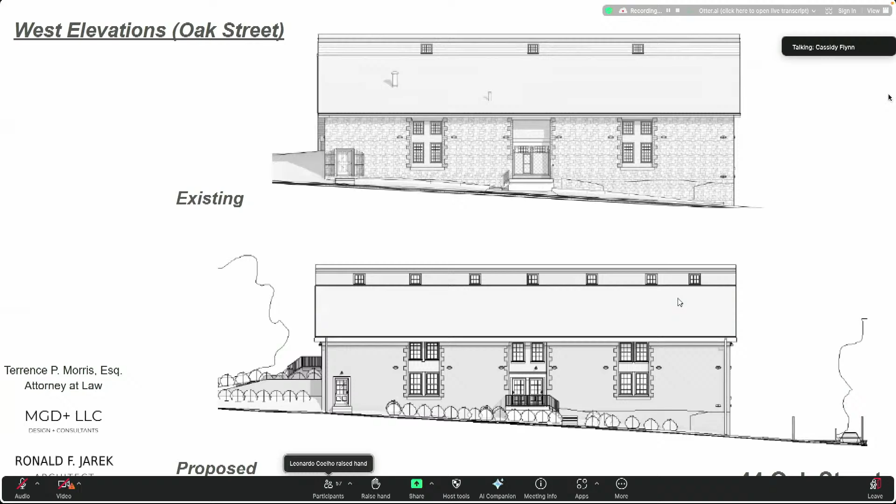We now move to a look at the elevations. The elevation on Oak Street, where the major challenge to this residential conversion is basically getting light into the upper levels to make residential use possible. In this particular case, you'll see some added windows to the roof monitor, as well as a refurbishing of the entrance for more residential feel.

Moving to the north elevation, and I should say that the north elevation and the south elevations are both similar. They are wood frame facades on the second level. These wood frame facades allow for increased fenestration. They're also characterized by commercial loading docks. You'll see in this particular picture that we have added fenestration to allow additional light, and we have made the entrance to the building more residential feel without reconfiguring the original entrance, which maintains its shape.

South elevation, as I said, is very similar to the north elevation in terms of the need to change certain things with the fenestration. This elevation, however, has a very beautiful arched entry, which is being refurbished from a loading dock into one of the main entrances of this building.

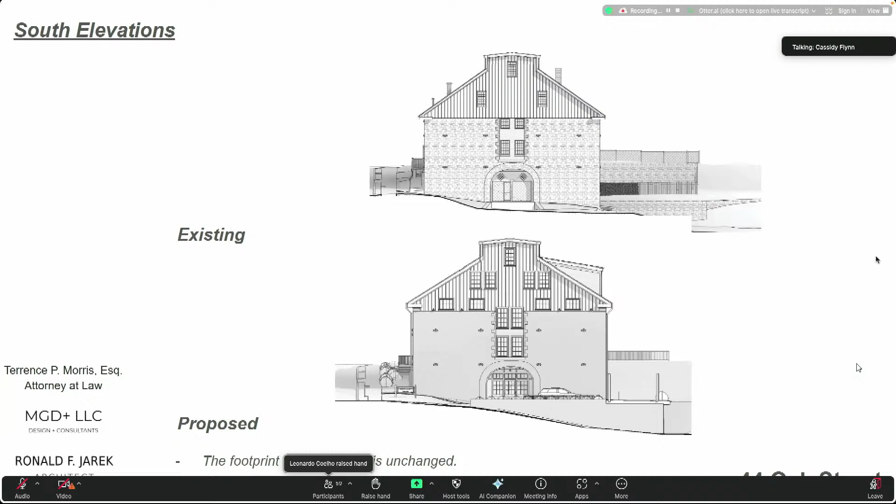On the rear elevation, there is a shed dormer roof established on the roof line, which significantly was approved by the Upper Falls Historic District Commission. In addition to that, there is covered parking shown to the lower left of the building, a covered parking canopy for 8 of the 12 cars that are provided on site. Again, this side of the building features an arched entry; this building historically has an entry on each of the 4 or 5 levels, and it's unique in that regard.

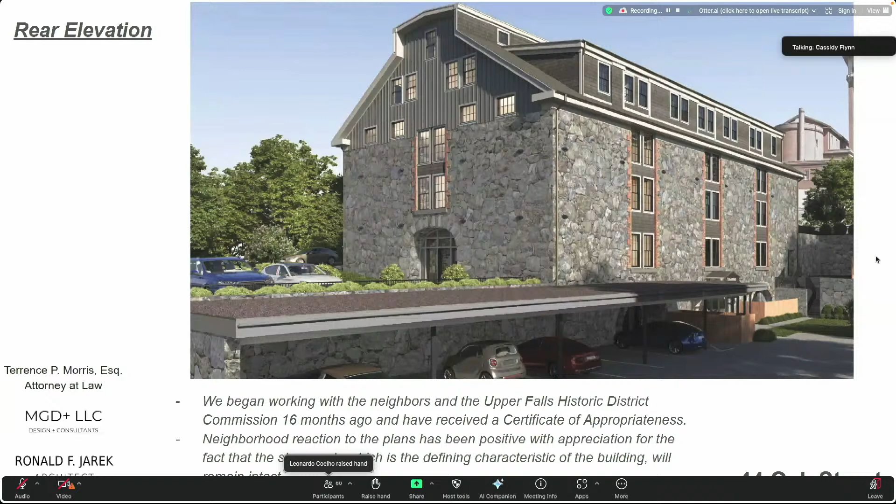Next, we go to the impervious surface comparison. There we go. The existing exposed asphalt will be reduced by 50%. All utility and curb cuts to service the building are in place. Nonetheless, we're proposing to reduce the number of curb cuts by removing one and the loading dock on Oak Street entirely. In addition, the existing curb cut on Cliff Road is being moved further from the intersection with Oak Street for safety reasons.

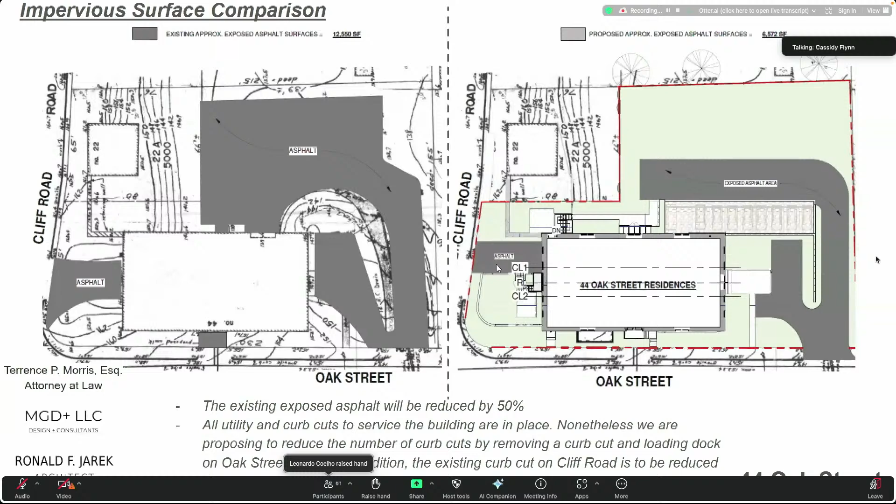Stormwater control, which is an important issue, is currently lacking on this site. It is to be addressed by the installation of subsurface drainage systems and a regrading of the topography to a collection point where all the storm water and runoff and roof drainage will be retained and controlled on site.

Finally, the landscape plan shows tree removal of 92 caliper inches and replacement trees of 126 caliper inches in compliance with the city's tree ordinance. A licensed arborist, having extensive experience with the requirements of the ordinance, has been engaged, has inspected the site, and has made recommendations which are shown on the final site plan to protect trees elsewhere on the site.

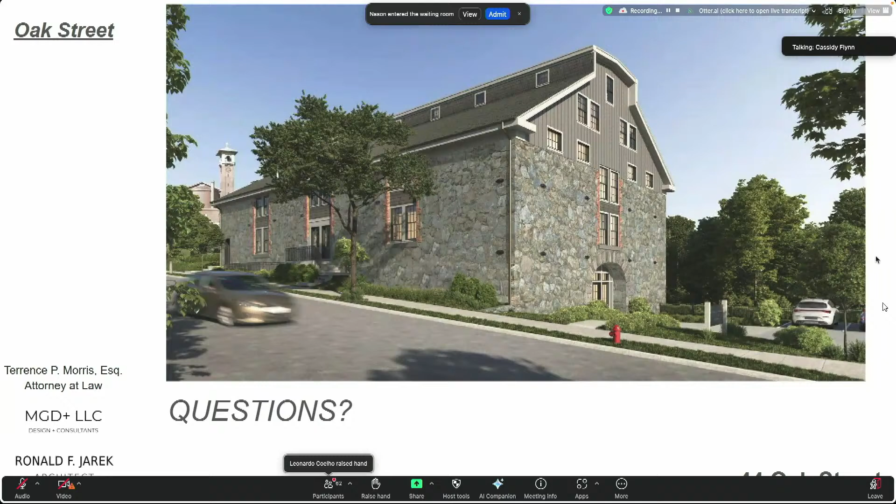And with that, Madam Chair, members of the committee, that concludes our formal presentation, and we are available for any questions you may have. Thank you, Mr. Morris. And as you promised, that was under 5 minutes. Appreciated. Thank you very much. We'll hear from planning. I think this will be very brief. This has been before us before, so let's hear from planning. Ms. Whewell, is that you? Yes, thank you, Madam Chair. Attorney Morris, could you stop sharing the screen, or your associate? Okay, thank you.

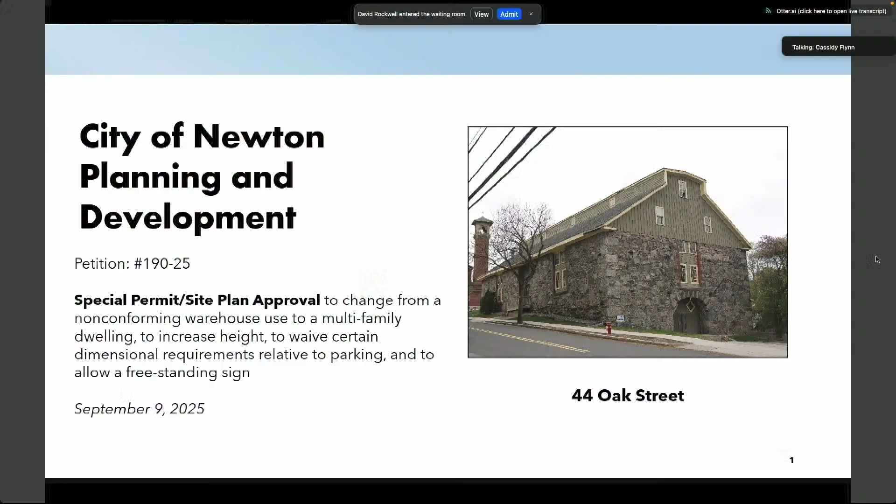So this is petition 190-25. It's a special permit to change from a non-conforming warehouse use to a multifamily dwelling. Some updates. This was continued from the July 8th, 2025 public hearing. Since then, the petitioner held a community meeting, which was requested at that first public hearing. Two of the trees initially proposed to be removed will now be maintained. That was shown in updated materials from the petitioner. The proposed dormer and overall site work remains the same, and the relief required remains the same.

So planning previously noted that this proposed residential use is compatible with nearby uses. The design preserves the historic character of the structure and was approved by the local historic commission. Much of the zoning relief requested, height and setbacks, reflect the existing conditions of the building and the site. Its status as a corner lot further constrains the site with parking and driveway placement, sort of necessitating that relief. And the freestanding sign that requires special permit relief will assist in wayfinding. Just some short updates there, and that concludes the planning presentation.

Thank you. Thank you very much.

Now is the time when we ask if there's any public comment. Anyone, any members of the public, either in the chamber or on Zoom, want to speak on this? We typically give 3 minutes per person, and I'm just saying that out loud because as we get into some of these larger, more complicated projects, if there are lots of people who want to speak, I may cut that back to 2 minutes in order to be able to hear from everyone. I don't think that's a problem tonight, but I'm just letting you know that if you'd like to speak, you have 3 minutes.

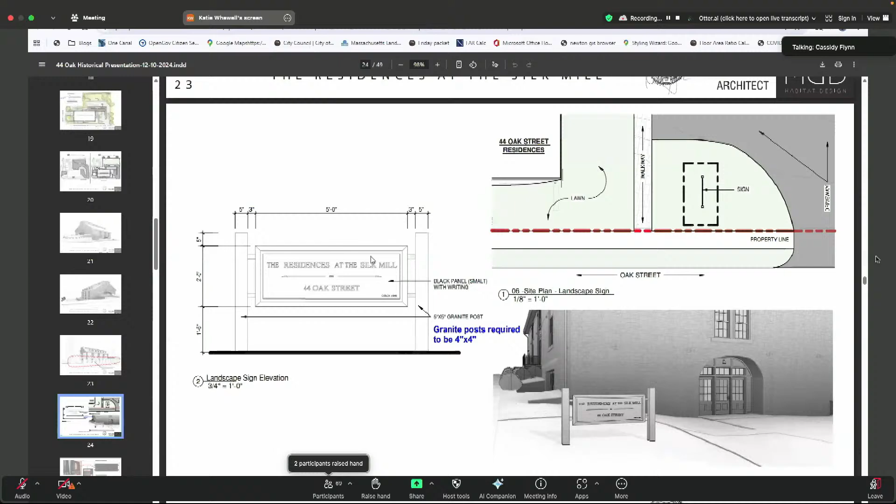Thank you, Chair. I will defer to my colleague from Ward 5 and take up the last speaking space. However, I did look under the NewGov files. I did not see a sign, and I assume Ms. Whewell misspoke when she said 35 square feet. That would be a big sign, wouldn't it? It would be. I have located it. I can share that. I had just wanted to make the point that there is a size restriction and there are multiple layers of review on the sign. Happy to pull it up. We're happy to give you another minute or two rather than feeling rushed. Okay, there you go.

And it would help us, I think, to know where you propose locating it on the site. That's clearly on the north end, along Oak Street, at the north part of the site. Those dimensions look accurate to me for the size. I was going to say 5 feet by 2 feet is the maximum, and that is the dimension size of the sign on the plan that I'm looking at right here. Councilor Lucas, are you set with that for now? Okay, Councilor Downs, are you done?

I will take up more at the end and let you go to other councilors and keep my hand up for now. Okay, I'm going to ask all councilors if you can really try and limit yourself to once per meeting. I understand that sometimes new information comes up, but for the sake of time, given how much we've got before us in the next few months, once per night would be my preference. I agree, but it's my ward and I think you want me to make the motion. I understand that. I'm just trying to announce it for everybody else's understanding. Thank you. Councilor Leary.

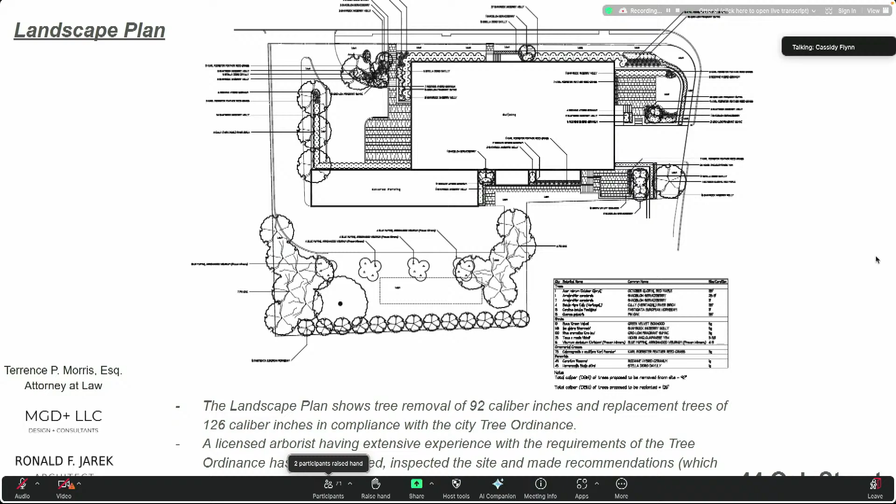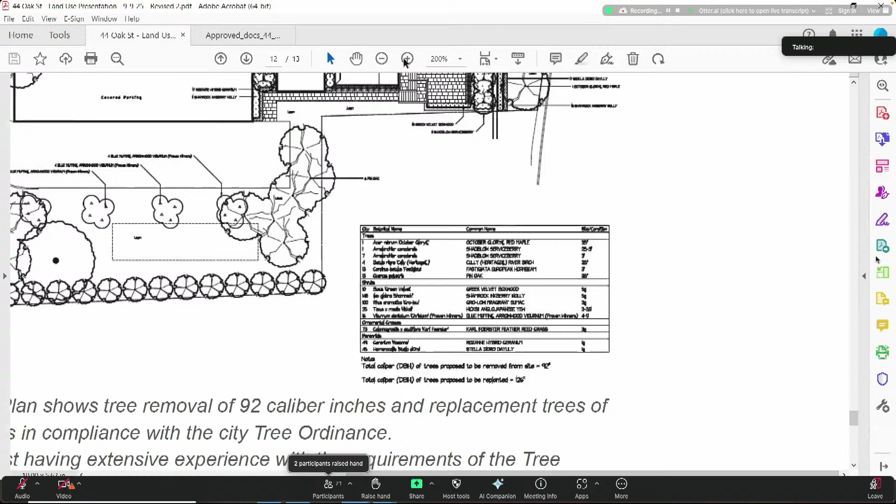I think the biggest emphasis that we had was on basically the number of caliper inches we were replacing, 50% more. Can't really read those right now. It is kind of hard to read. Possibly zoom in. It may still be too blurry, but the plant list is unreadable, at least by me here. Leo, can you blow that up at all? Is that in the little box? There we go. Still a little hard. Oh, there you go.

If you have your glasses on. It's blurry, but it is in the packet, the plant list. But they're all native species, correct? Green velvet, yes, correct. Okay. No, I think it's a wonderful project and I appreciate it. Most welcome. Thank you.

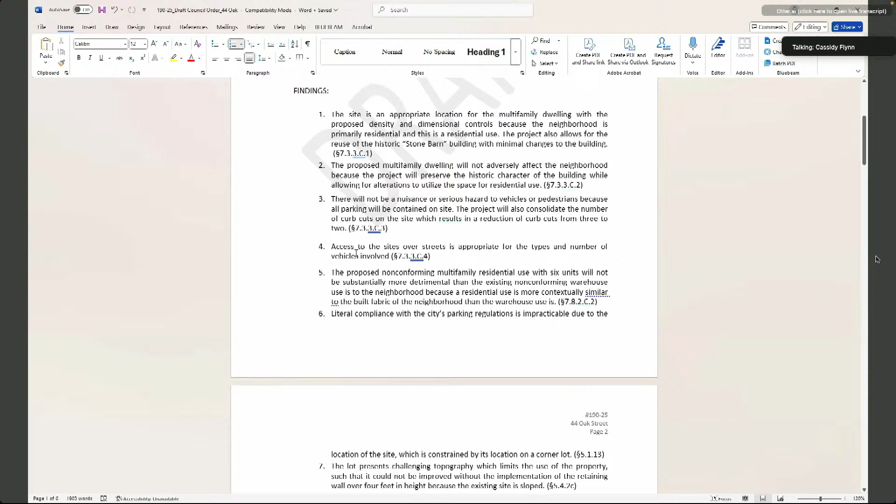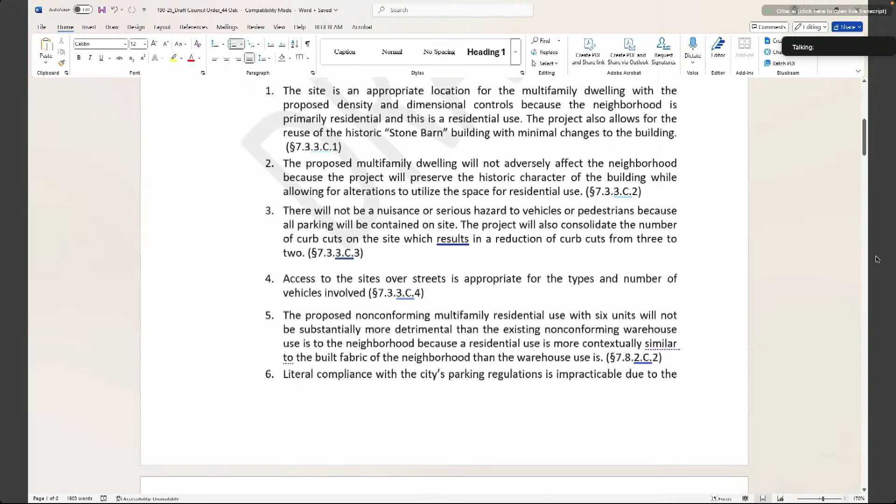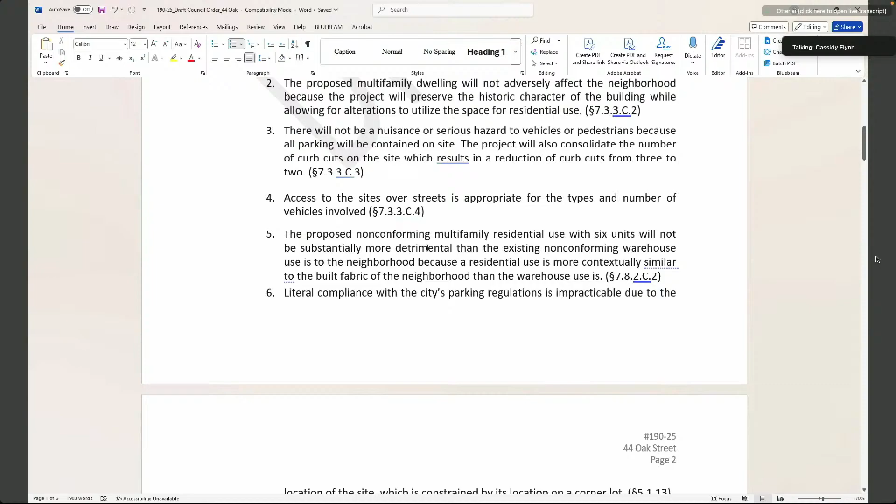So we have the 4 standard special permit criteria, or findings from the criteria. We've said that the site's an appropriate location for this project because the neighborhood is primarily residential, and this is a residential use, so it fits in nicely with that. The project also allows for the reuse of the historic stone barn building with minimal changes. It will not adversely affect the neighborhood because it will preserve the historic character of the building while allowing for alterations to utilize the space for residential use.

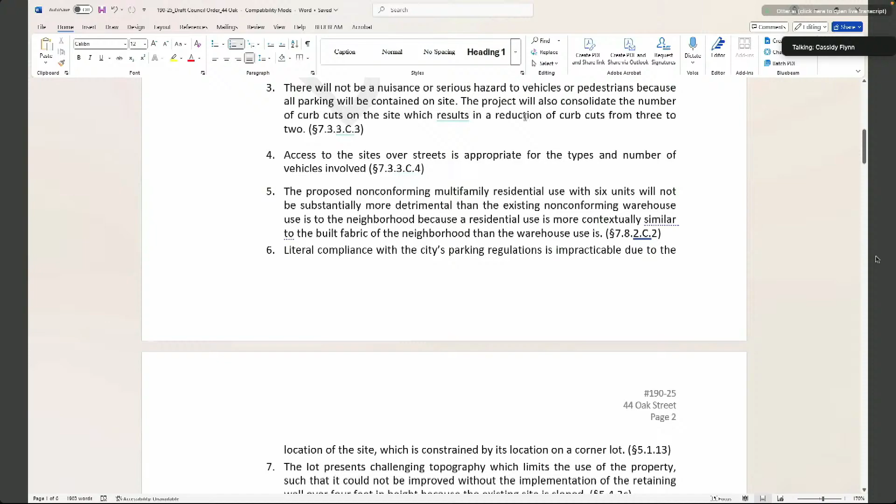There will be no nuisance or serious hazard to vehicles or pedestrians because all of the parking is contained on site. It will consolidate the number of curb cuts, resulting in a reduction from 3 to 2. Access to the site over streets is appropriate for the types and numbers of vehicles involved. The use will not be substantially more detrimental because it's a residential use and is more contextually similar to the built fabric of the neighborhood than the warehouse is.

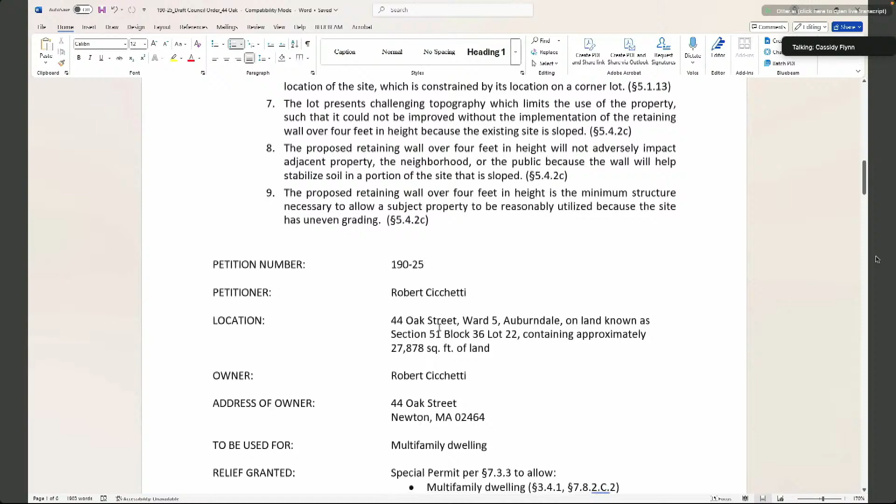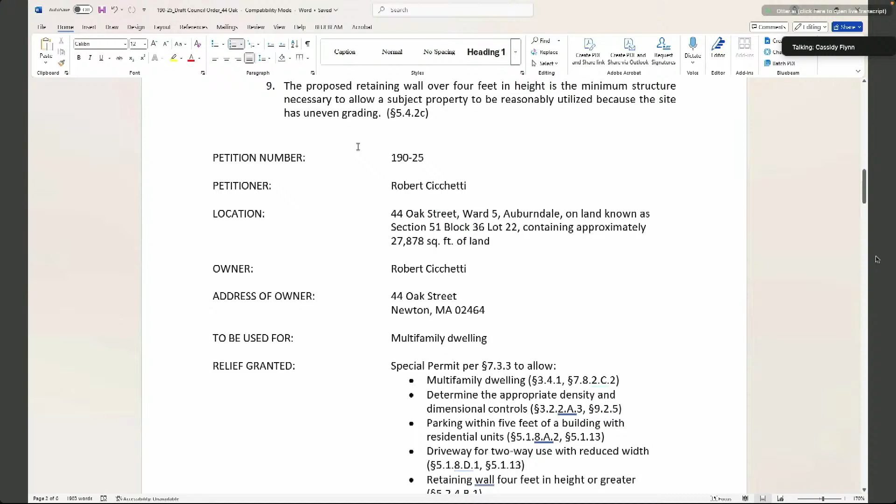A literal compliance with the parking regulations is impracticable due to the location of the site, which is constrained by its status as a corner lot, subjecting it to greater dimensional standards. These last three are around the retaining walls: the lot presents challenging topography which limits the use of the property such that it could not be improved without these retaining walls, because the site is sloped and has varying topography. The retaining wall will not adversely impact the neighborhood because it will help stabilize soil in a portion of the site that is currently sloped. It is the minimum structure necessary to allow the property to be reasonably utilized due to the uneven grading of the site.

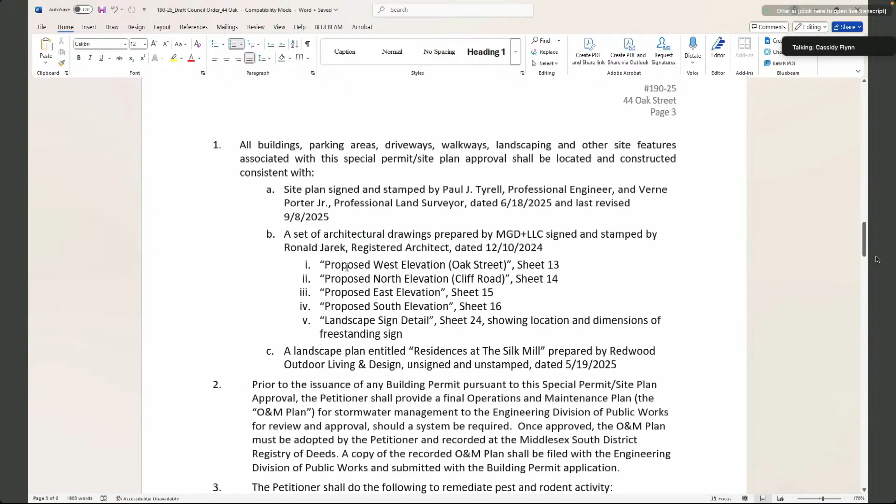And I will move down to the conditions. So we have the standard plan referencing conditions. This locks in the plans that were submitted to the Land Use Committee in the special permit: the survey, the architectural drawings, as well as the landscape plan.

The second condition requires an operations and maintenance plan for stormwater management from the engineering division, and requires that O&M plan to be recorded at the Registry of Deeds. We have the standard pest and rodent control condition. We also have the standard construction management plan condition, and the I&I ordinance condition. Because this is 6 units, trash shall be handled by a private entity. We have the standard building permit condition.

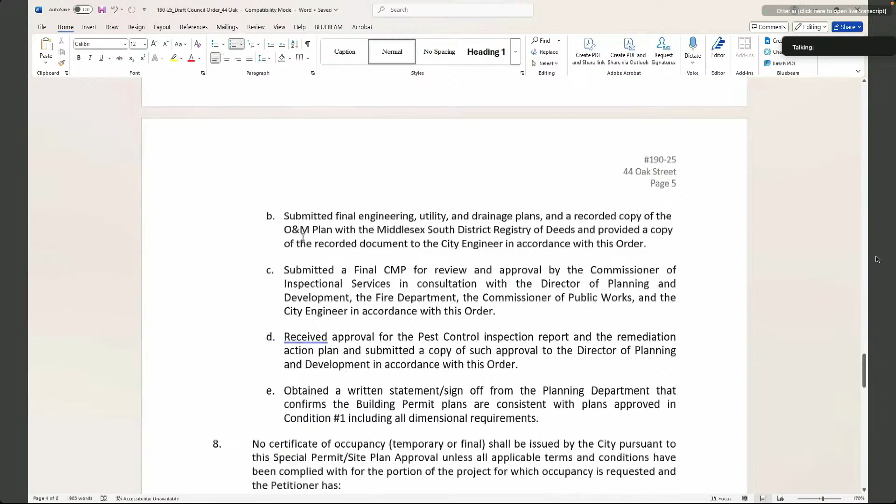And then the standard certificate of occupancy. Landscaping shall be maintained in good condition and replaced as soon as feasibly possible. And then the last condition just allows the Commissioner of Inspectional Services to issue temporary COs.

Thank you, Ms. Wewell. So there was a reference to the historic nature of the building. There is nothing in here about additional construction supervision. I personally agree with Mr. Temple that it is not our role to give that job to the Upper Falls Historic Commission, but I'd like to go back to Councilor Farrell and Councilor Getz to see if there was something that you feel would be appropriate or that is omitted in that council order. Mr. Temple.

Sorry, Chair. I was just going to add that if the committee wanted to, you could certainly add an additional finding that talks about the Historic District Commission's approval. Or, if you really wanted to, although I don't believe it's necessary, at the end of the plan reference condition, you could add the certificate of appropriateness there as an indicator that it must be complied with.

Thank you. I think that's a good suggestion. Councilor Farrell, does that suit you? Both of those? I guess raise your hand. I would, yes, but defer calling on you, Councilor Getz, if I may, to Councilor Getz.

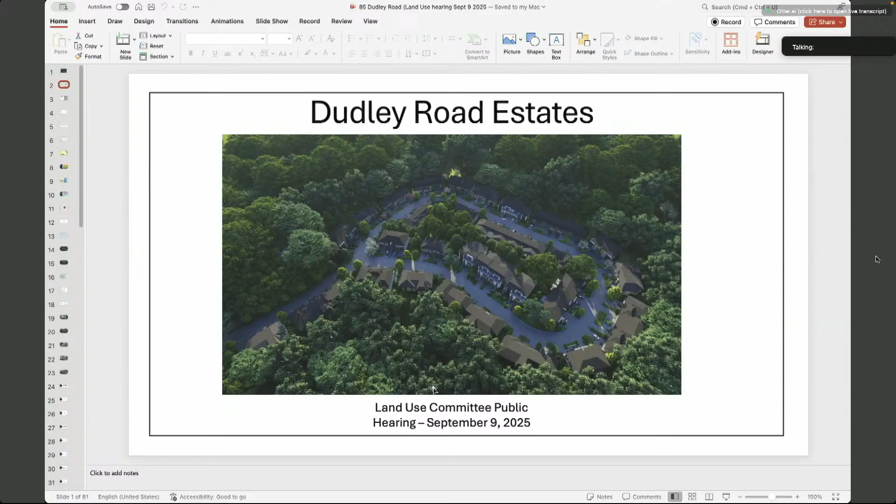With me tonight are members of the development team, a few of whom have strong local ties to the city of Newton. Cindy Stumpo is the principal of Dudley Road Estates LLC. She's also the owner of C. Stumpo Development, located in Newton on Route 9, a short distance from the subject property at 85 Dudley. Cindy grew up on Dudley Road, is well known in the community, has decades of experience building homes in the city, particularly on Dudley Road, and has local experience and knowledge that are important to understand the neighborhood.

Verne Porter, a professional land surveyor and consultant of the team, is also helping us tonight. Vern grew up in Newton and is very familiar with Dudley Road. Vern also has had an office in Newton Upper Falls for many years and has worked in the city. Michael McKay from McKay Architects is the designer of the project. Unfortunately, Michael is delayed unexpectedly, so his associate, Justin Bellucci, will be stepping in for him tonight.

Giovanni Vodera is the principal engineer of Vodera Engineering. Mark Zarello of Architect 31 is our landscape architect. Randy Hart from VHB is our traffic consultant. Patrick Daly is our energy consultant. And attorney Jeffrey Allen from Lawson Whiteson is our general counsel.

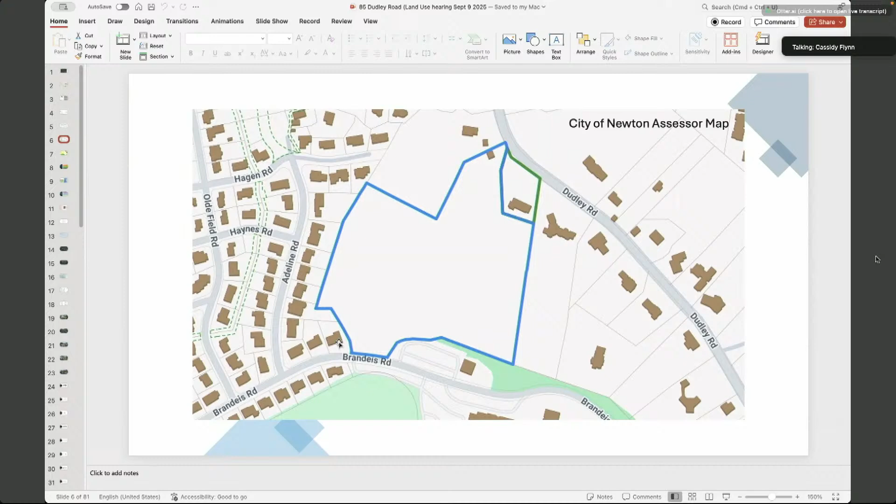Our proposal tonight consists of keeping the existing single-family home at 85 Dudley Road. Our plan currently is to rehab that property and erect 70 new townhouse-style single-family attached dwellings in 26 buildings. The new buildings will consist of duplexes, triplexes, and quadplexes. Unit sizes will range between 2,800 and about 4,500 square feet. The proposal will have a single entrance/exit off Dudley Road with a newly created private road, and the units are intended to be condominiums for sale.

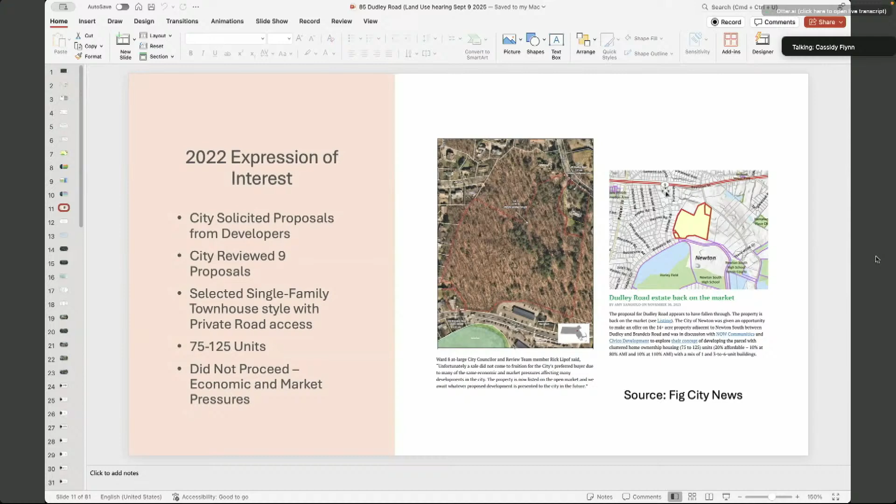And the developer at that point in time noted that a density of 75 to 125 units was an appropriate number for this location. For various reasons, economics and market pressures, the project did not proceed. The property was then put on the market, and hence my client has this property under agreement.

Justin, are you prepared to go ahead with this presentation? Are you able to find him on Zoom? Has he been asked to share his screen? There's one Justin on Zoom that I can promote. Yeah, if you can ask. He could change his name so that we know that it's really him. Okay, there we go. Can everybody hear me now? Yes, we can. Thank you. Okay, sorry about that. I was muted.

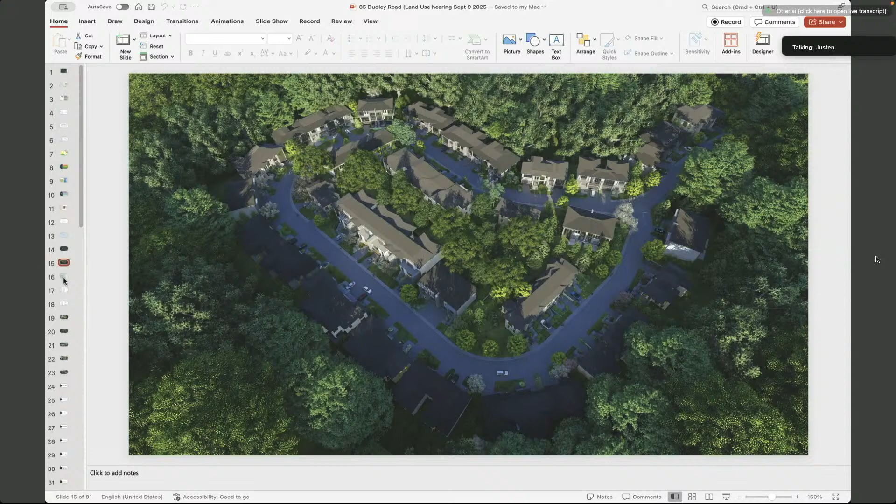Each dwelling consists of a 3 or 4 bedroom unit, along with the existing standalone single-family home, which will remain a single family. Here's the second view showing the opposing rendered view with the Dudley Road entrance in the top right. One thing that's hard to show on these renderings is the sharp grade changes throughout the site. Those grade changes produce a mixture of designs with garages at first floor grade, drive under garages with first floors above, walkout basements, allowing the buildings to conform to the existing topography wherever possible.

All the units are designed to be accessible and have the highest level of energy efficiency. First floor bedrooms are provided in 48 of the 70 units. That's about 70%. All the units will feature 3-foot wide doors and have elevators servicing all levels of the homes. Energy efficiency will meet or exceed all building code requirements. Included in that would be closed cell insulation, the window and door requirements, Energy Star appliances, and mechanicals.

Proposed square footage for the new units include basement, first floor, garage, and second floor square feet. They range from 2,880 square feet to 4,550 square feet. The existing house with a total proposed square footage of 9,051.

Just to give some perspective about the size of this development, the total proposed square footage for all the units from proposed grade would be about 240,000 square feet, which would produce an FAR percentage of 0.35. The total proposed square feet from existing grade would be a little bit higher at 266,000 square feet, which would produce a FAR percentage of 0.39. And for reference, the allowable MR1 FAR would be about 248,000 square feet at 0.38 FAR.

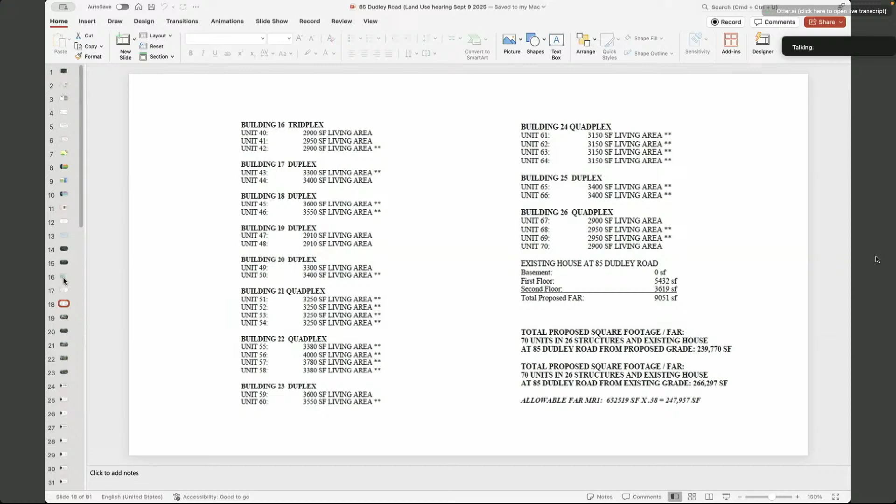The building height from existing average grade ranges from 32 feet to about 54 feet. These higher numbers are caused by the extreme existing grade changes of the development. The dwellings with excessive height numbers have walkout basements and or drive under garages where you would walk out the first floor to grade out the rear of the house.

Height from proposed average grade would range from 32 feet to 36 feet. There's two outliers to that, which would be building 5 at 38 feet, which we will work to reduce that number to get under 36, and the existing dwelling at 85 Dudley is about 38.7 feet.

The majority of the units are technically 3 stories because of the grade changes. But when the dwellings are finished and the site work and retaining walls are completed, all buildings will conform to the max 36-foot height as viewed from the street. Third story mostly would be basements too.

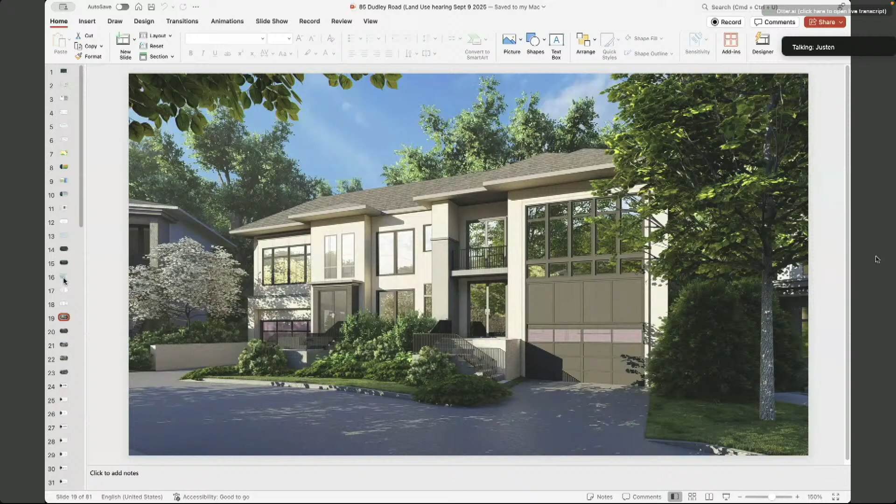The proposed architecture was intended as a reflection of the quality of the homes in the surrounding Dudley Road neighborhood. Contemporary designs are the theme of this development, featuring clean lines, asymmetry, large windows, and low-pitched roofs. The exterior finishes are a mixture of fieldstone, limestone, and smooth stucco. So this is a sort of a streetscape rendering of a duplex. You'll notice the house next door is a little bit different. We're going to vary the dwelling designs wherever possible to achieve more neighborhood feel for the development.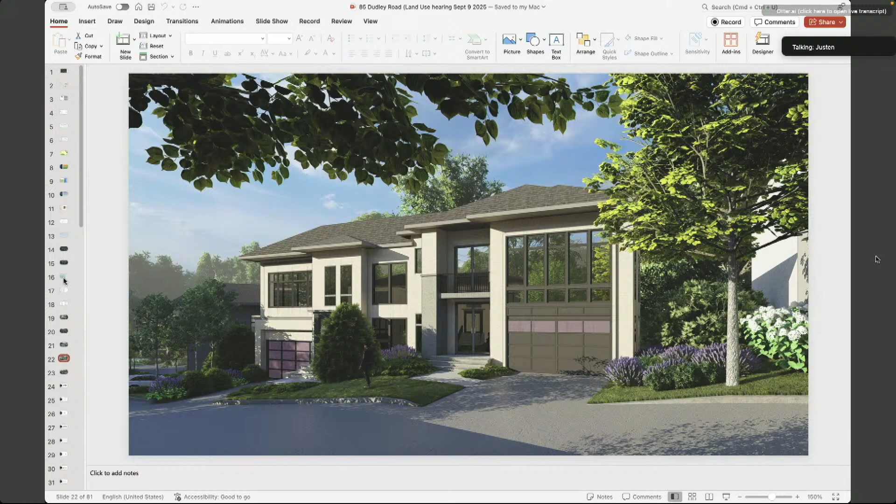Here is a quadplex showing the exact same thing we just talked about. As you go down the street and the street goes down lower and lower, each unit is stepping down to remain at a similar height to the next unit beside it. So conforming to the natural grade is the way we're developing these.

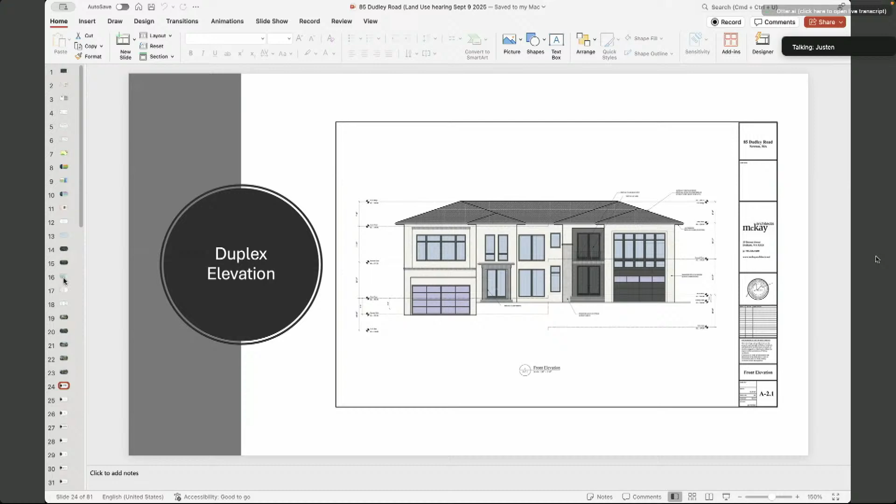So here's some typical units. This would be a duplex elevation. It shows a mixture of the stucco and the stone with different levels of garages as it goes down the hill, so it'd be typical. This is a typical duplex floor plan, open floor plan. Some have offices, some don't. 3 to 4 bedrooms per unit will be typical.

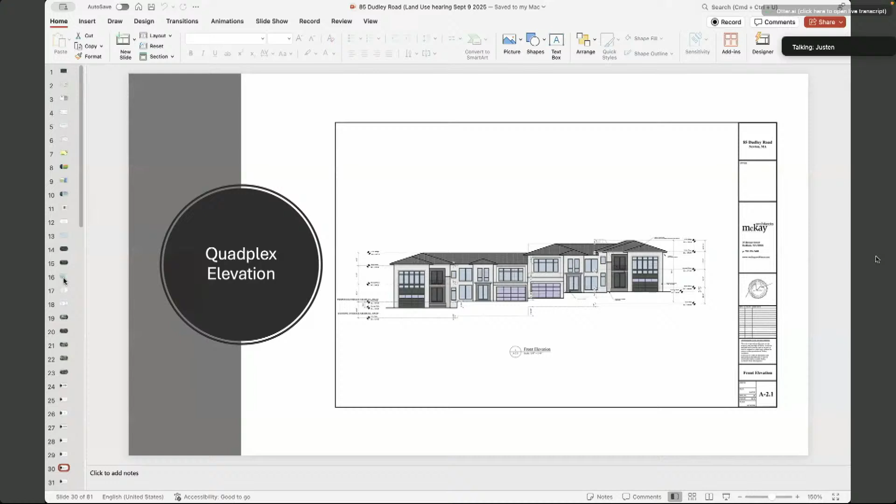Typical triplex elevation. Again, stepping down and down. Everything is very similar in the open floor concept. 2-car garages, 3 to 4 bedrooms per unit. Lastly, the quadplex. Again, it's almost 2 duplexes put together, differing grade levels as it goes down, similar to the rest of the units with open floor plans, 3 to 4 bedrooms per unit. Varying garages too, so sometimes on the outside, sometimes connected in the middle.

That'll about do it. If you have any questions, I'll be here to answer. So with that, I'm going to turn this over to Vern Porter.

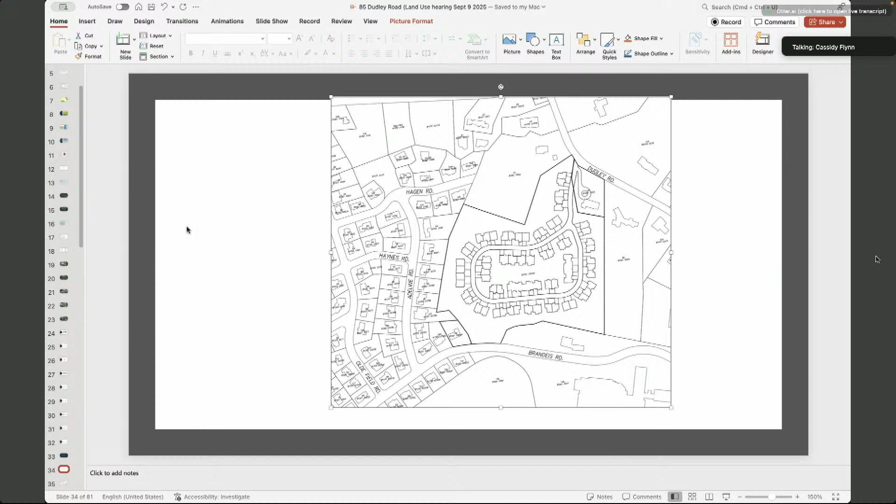So we're doing a proposed development with 70 units. The road is going to come from Dudley Road, and as you know, the site is very steep. We go to the existing conditions. You'll see that Dudley Road is elevation 205. Brandeis Road is elevation like 118.

Brandeis Road stops right at the school property and is now Lions Way. I think I saw the sign the other day. So the path that I talked about walking down is on that plan. You look, you see the path that comes down like right through here. Our development is going to have a road that comes down and around and loops back.

The idea to develop this site, I think the city ran into the same issues, is to create an area that you can put some units in and try to stay away from the perimeter of the property. So what we've done is come into the middle, created this area that's between that big P. I call it a P because my last name's Porter, so I didn't have anything to do with it, but all the buildings will be brought around there.

And there's some other site conditions. There's a high point in the middle, right in here. Right in there is a high point, it's elevation 197. The elevation of the road way up here is 205. And our proposed road here is like 185. Comes downhill, downhill, downhill to a low point, about 148 right there.

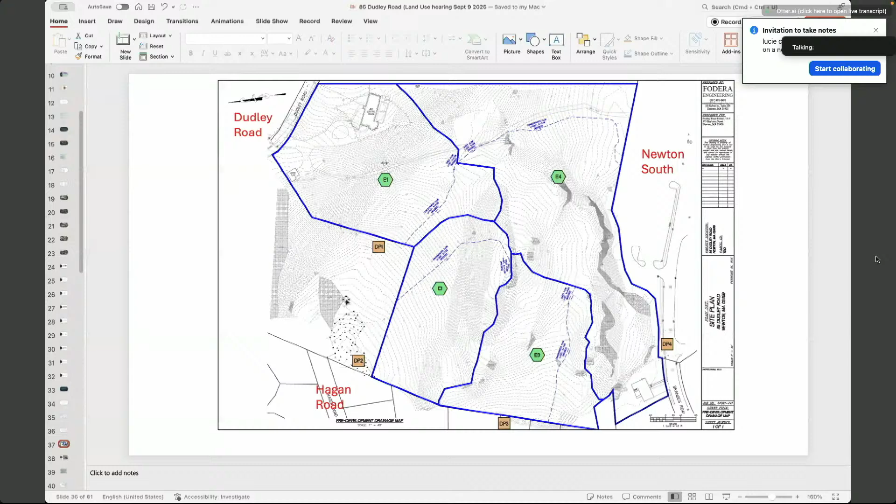And all of the water in this section goes down this way towards the houses that are on Adeline Road. So this is Adeline Road over here. This is Brandeis Road over here. This is Hagen Road. This is a small little wetland area. And what we're proposing to do is to divert the water. So go to the next one.

And we used values for woods and brush. Clearly, there's a lot of exposed ledge in there, which has a lot more runoff, but we were very conservative when we were doing the calculations to use values that would make it so that we're not going to have any issues.

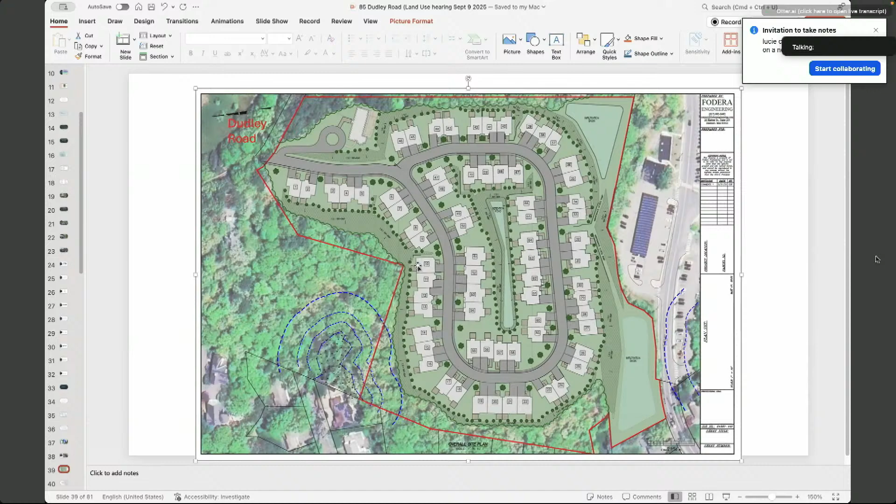We're also going to have water and sewer. The city's asked us to put a water line through. Yeah, go to the utility line. That one. No. Let's go that one first. Yeah, we'll go that one first.

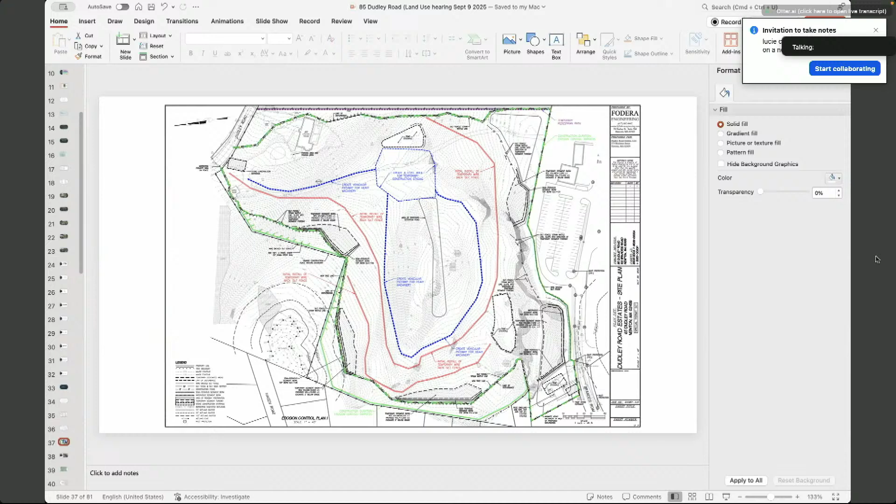And these are extras, just so that during construction, you can't have 200, 300, 400 feet of slope that's open, not vegetated. If it rains, it's gonna come crashing down. So we've put these in; they act like a weir in the way to slow down the water. We also have infiltration along siltation barriers along the property lines, and where the slope is steeper, go back to the other. Yeah, so where the slope's steeper, like along Mr.

Younger's property here, and then along this property here, you see those little weirs. Those act just like little stone walls that they have along the seashore. So as the water comes down, it takes the energy out so that it's not crashing down and going anywhere. So it slows it all down so that we don't have stuff going everywhere.

We also have some temporary basins. This is a temporary drainage basin, and this is a temporary drainage basin. And there's a third one over here. And this one will also be a temporary one. So what those will do is they'll give places for the water as it's running off to store so that it doesn't just jump over the hay bales and go to the other properties. It'll all stay on our site, be contained.

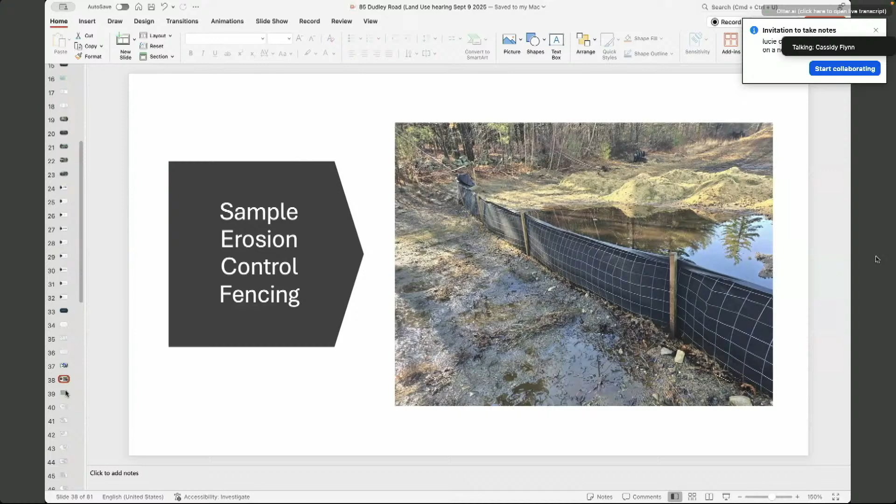The hay bale ones. This is a typical siltation barrier that they'll use. Those red lines, this is what it will be. It's a silt fence with a wire mesh in it that's pretty sturdy. We would also use along with that a wattle, which will be put in front of it to collect the water as well. Utility.

We have, let's see that. So the walkway, we're trying to maintain that walkway to go into Newton South. So during construction, we're going to put a temporary walk that's going to run along the southern border right there. And it's just going to be a 5-foot wide strip of our property that'll be fenced on either side. It'll go all the way from Dudley Road to Newton South so that people can be able to walk back and forth to Newton South.

I've been doing it my whole life, and there's lots of kids that come through there. Some of them are nice, some of them aren't. The poor owners have lost things over the years. They've had a couple of fires, but for the most part, the kids are really good. And they just walk through, and the owners there have always been very nice about it, and they've always known. And I think they're a nice family.

So we're going to recreate this walkway, and the way we're going to do that is we have a sidewalk, and it's going to run down that right side of the road, and then they'll have a crosswalk there at the intersection, and then it's going to go around the inside of the circle. We're going to jump to another plan. So then it goes around the inside of the circle, and then comes down, and it keeps going right there. It crosses over again, and then we've built access roads so that we can go down and maintain these ponds. They're not really roads, they're just level areas that you can actually drive equipment down. You'll be able to drive a pickup truck down there.

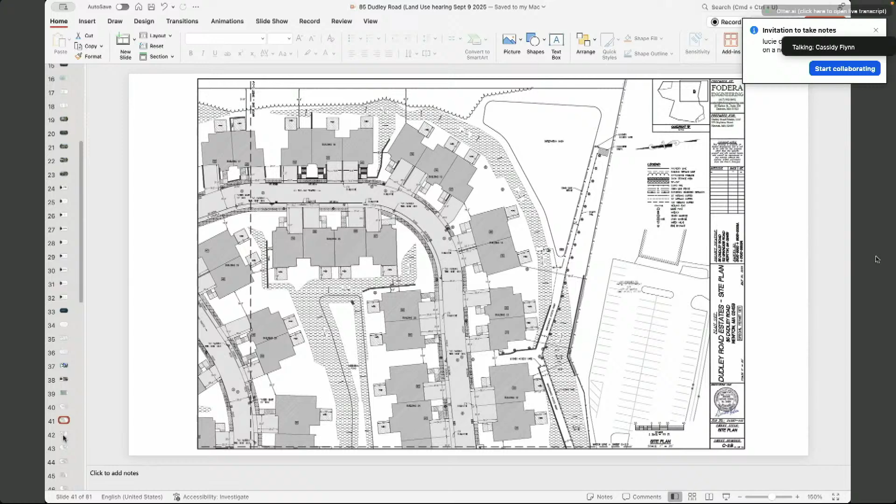So that walkway is going to go down that access road to a point where it went through the fence, and there's a small set of stairs there. Clearly, this path is not ADA compliant. It wasn't for the last 60 years that I knew, but we would like to provide the community with the access they've always had.

So this is just other sections. We do have it all blown up. So if you had a specific question, the areas that you see that are fuzzy, like around the outsides of the buildings, those are actually the riprap slopes. They're a tight slope. Most of them are 1.5 to 1. They're not retaining walls, but they are a slope. Mark will discuss how he'll landscape and treat those. All of our detention basins, utility one.

All right, this is a basic utility layout. So you can see that we have a water line that comes here. And the city's asked us to provide them with a larger water line than is required for us. They were asking us to put I think a 12-inch line from Dudley Road to Brandeis Road. The pipes in Brandeis Road and the pipe in Dudley Road are only 8-inch. That's kind of what we need for our property. So we'll be using 8-inch through around the circle, but we will run the size that the city asked for down through here and out to Brandeis Road.

So I'm just going to do a quick run-through of how the drainage actually works. So the road bisects all the area over here. All the water goes down on this plan. The road intercepts it. We collect it. The water here gets brought into this pond right here. The water here goes up and comes around with it. Once this pond is full, this is the outlet structure. It comes over and it meets with the other water coming from the other part of the road here, goes down into this pond. This pond has an outlet structure that takes the water through here and then brings it down to this pond with the other water from this pipe. They both enter this pond, and then it's all stored. And if there is an overflow, it would go out here up to Brandeis Road.

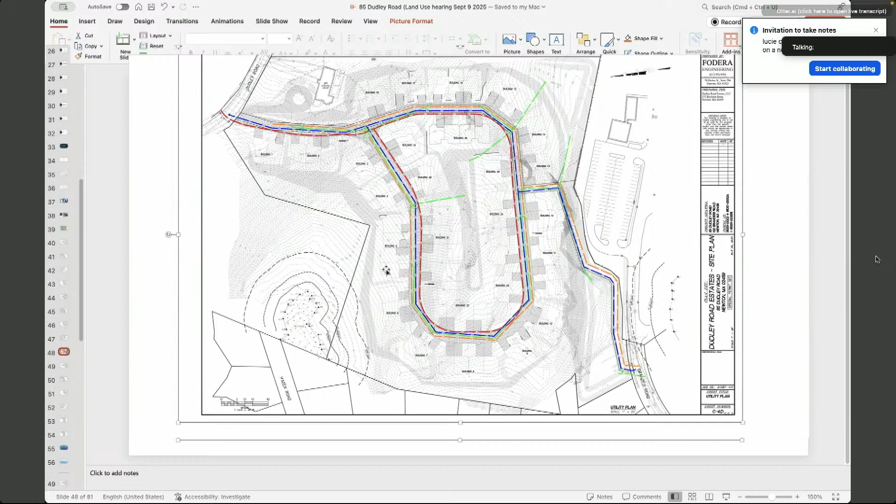And I think that's about it. We have the wetlands, we got an order of conditions. If anyone had any specific questions, we can answer them.

It's the fire department plan. We did meet with the assistant chief. He asked us to provide him with these sketches, which show a bus 45, which is their engine, driving around and being able to make all the turns and whatnot.

We did have peer review, just so everyone knows that was done, and there was a memo that they did. We've provided some quick answers to their memo, and we'll bring the backup information as we proceed in our design. There wasn't anything that was crushing for us, so it's all stuff we'll be able to manage without any problem.

And what else? Oh yeah, we did do the fire truck both ways, so they can go either way and it doesn't matter which way they go. There'll be enough room.

I think we were talking about parking in certain places, and the fire department asked us - they had some particular places that they noted in their approval that we shouldn't park. They also asked us for one of the little red boxes so someone can pull, and that's going to go - they told us where to put it. It's going to go at that intersection.

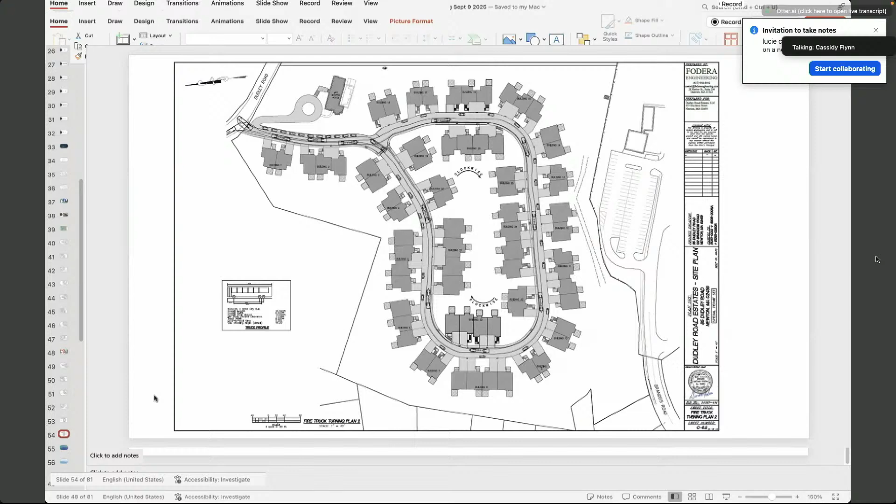And what else did they ask for? Oh yeah, they asked for 4 hydrants, and they went through the sketch and gave us locations they prefer them to be. So we followed their instructions.

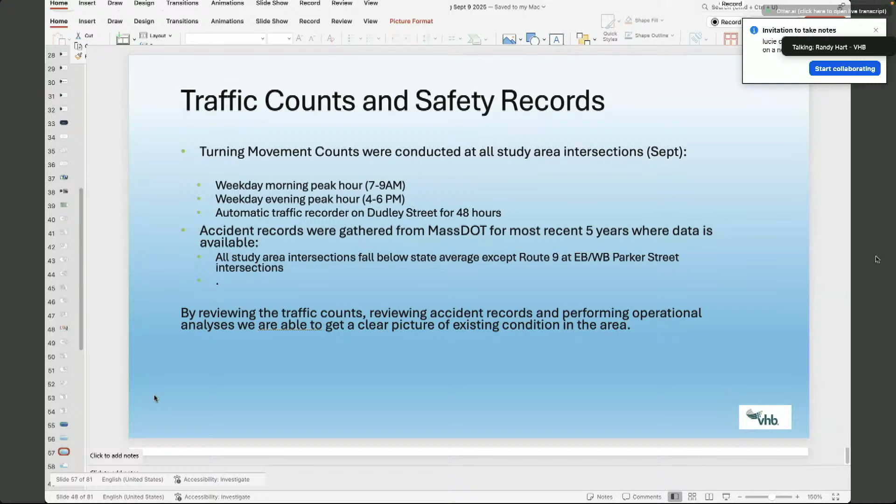In terms of the project itself and what it'll generate, we rely, as most people do, on the Institute of Transportation Engineers, ITE trip generation manual. For this particular project, Land Use Code 215, single family attached housing, was appropriate for the projections. Based on that approach, we anticipate the project will generate approximately 33 trips in the morning, with 8 entering and 25 exiting, and in the evening peak hour about 40 peak hour trips with 24 entering and 16 exiting.

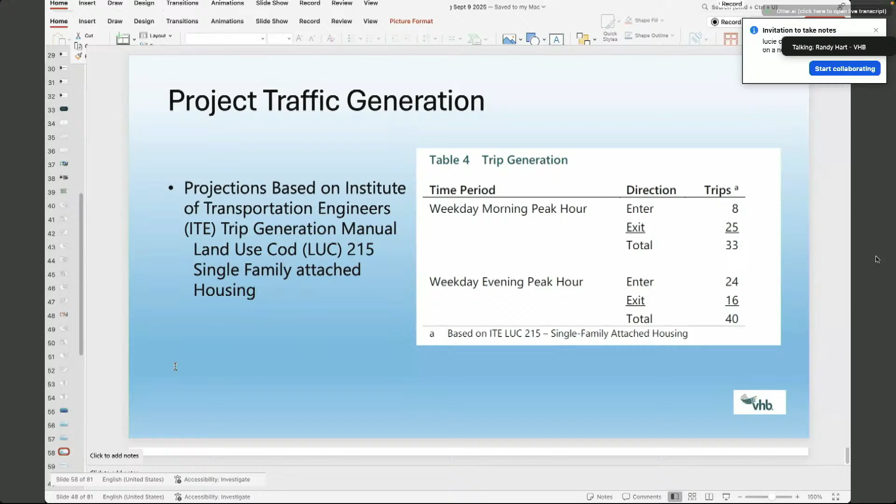In terms of access, access is something we pay very close attention to. We look at intersection sight distance and stopping sight distance. Stopping sight distance is the minimum required - you really need to meet that in order to have safe access to the site. Intersection sight distance is desirable to meet as well, but it's oftentimes not met. In this particular case, not only does the stopping sight distance exceed the minimums, intersection sight distance also exceeds the minimum requirements. So we have more than adequate sight lines available to us for the site driveway.

One thing we've heard a lot of along the way here is that Dudley Road - there's a lot of concern about speed and the narrowness of it and the lack of pedestrian bicycle environment. So we did a formal traffic calming assessment that looked at all of the various options that might be available to try to slow the volume down. We know the speeds out here based on the ATR data we did. It suggests that the 85th percentile speed northbound was 32 miles per hour, the 85th percentile speed southbound was 30 miles per hour, but the speed limit is 20 miles per hour. So yes, speed is an issue that definitely needs to be addressed.

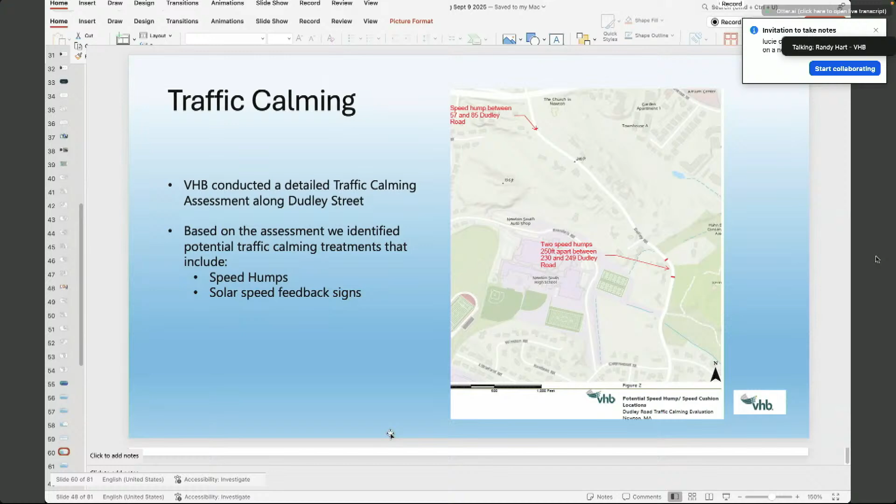In conclusion, I just want to mention a few things. One, as Vern said, his civil work has been peer reviewed. Our transportation work has been peer reviewed by BSC, and in general terms they were in agreement with the approach, the analysis, and the conclusions. They agreed that the speed humps and speed signs are a good idea and something that should be considered. We also performed operational analyses for both future conditions with the project in place and without, and when you compare the two, it shows there's really only minor influences on the study area intersections as a result of the project.

The peer consultant asked us to take a look at Parker Street at Route 9 eastbound, the signal, and see if there's any optimization available there. There are some tweaks and modifications that can be done to the timing and phasing to enhance operations there a little bit beyond what it is today, so that's something we're considering as well. That's a quick overview of the transportation work that we've conducted, and certainly I'm happy to respond to any questions as they come up tonight. Thank you for your time.

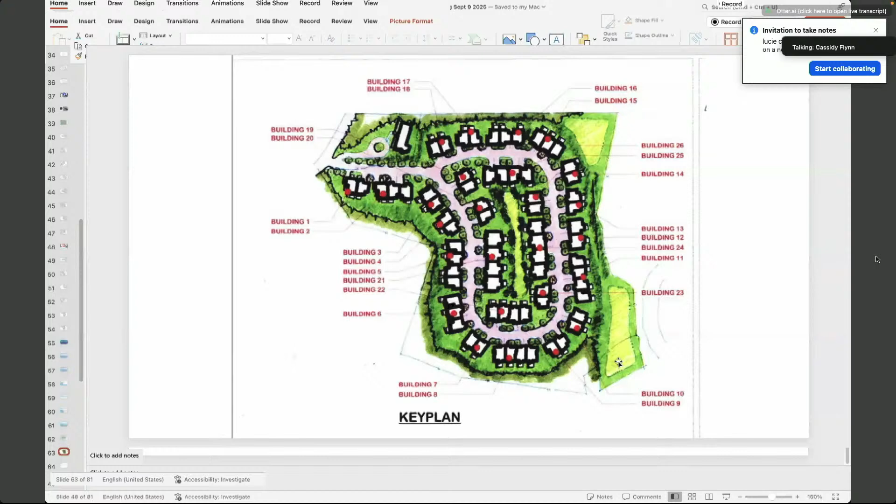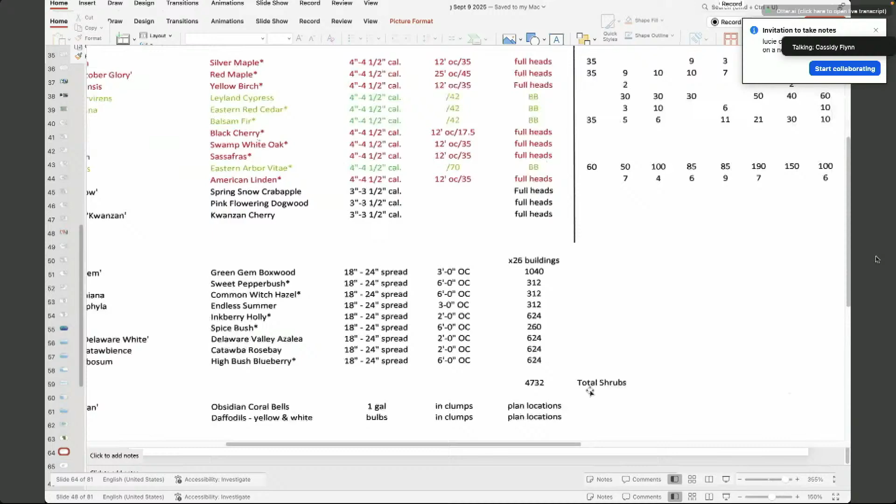There are — can we go to the next slide? So what we did was a test, and this is a preliminary analysis. It's not final, but it looks at, based on the criteria I've used on other sites, a plant list, shown on the left-hand side. I know you can't read it, but the green writing is evergreens and the red is deciduous trees. So there's a balance of deciduous and evergreen, and the total trees are distributed.

The trees are distributed in each of these 26 building groups. In looking at the strategy of how you would plant these 26 building groups, you can break it down by dividing the required caliper inches necessary to mitigate, by the size of the trees, organizing those by the types of vegetation we would use, and then ultimately put it together in a plan and a design.

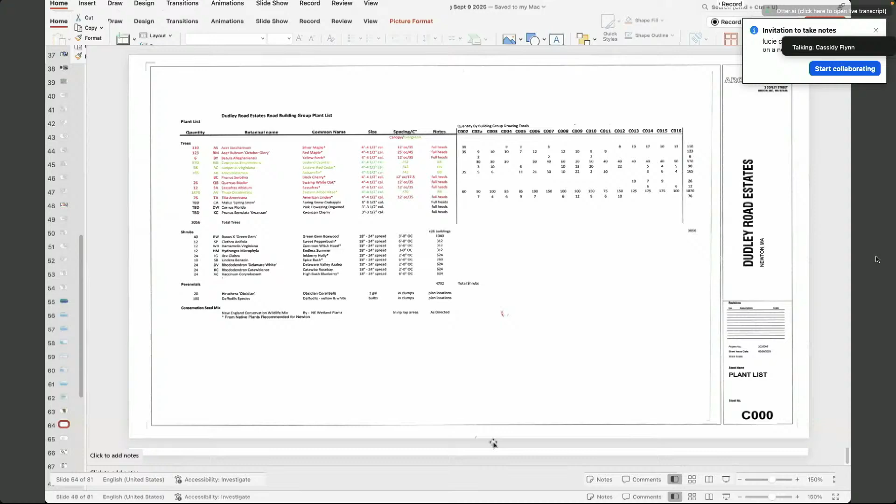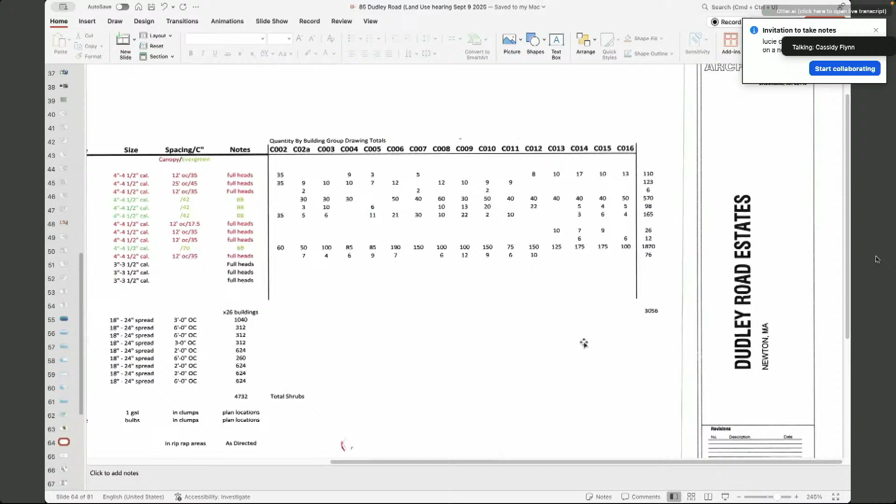Yeah, that's good. So what you see on the right-hand side of this list are the 26 different building groups and types of trees distributed within the context of each building group, creating a more biodiverse opportunity than what is existing right now.

So in looking at the 5 values that were discussed in the Conservation Commission's letter, the first was biodiversity, the second was erosion control, the third was mitigation to rainfall, the fourth was extreme heat, and the fifth was exposed ledge.

If we take these individually, I think biodiversity is dealt with regard to the tiered planting, the canopy replacement, and the potential for 3 times the growth at replacement trees that are put in at 3.5 inches. So the idea here is that over the course of time, these trees would grow and create a replacement canopy. In addition to that, 50% open space is required by the zoning bylaw, and we are providing 66%.

So I think that in terms of biodiversity, we meet some criteria, but again, we meet the criteria of biodiversity in terms of conservation, not necessarily preservation. So we have to just keep that in mind. And we have to realize that the best and simplest and plausible solutions are not necessarily always agreeable to everyone.

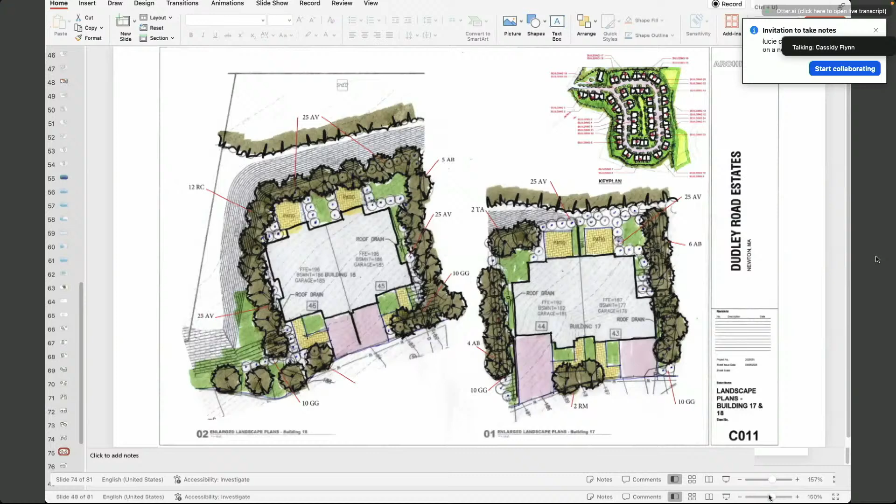These are 16 plans, some are doubles, but they essentially show the planting that is up for each one of the different building groupings, and how the buffer would be set up, how the imaging would be set up, and that can be traced back to the actual plant list that we looked at before, if you have the opportunity to do that. So when we get down to the bottom, if there's any question related to what we're going to see, I could leave you with the following. I could say that in the foreground, you will see the buffer, and that's the perimeter buffer of the site.

And if you look up in the middle ground, you'll see the riprap and you'll see the planting that is going to be distributed in various areas along the riprap to try and green that area. And then finally, the background of that image would be looking at the tree canopy, which is along the edge of each one of the building groups.

So basically, we're trying to use the idea that the design concept and the strategy of placement can bring about a reasonable project. Yeah, thanks, Mark. Thank you. I know that was a very, very short presentation. So we will open it up for any questions you may have. Thank you.

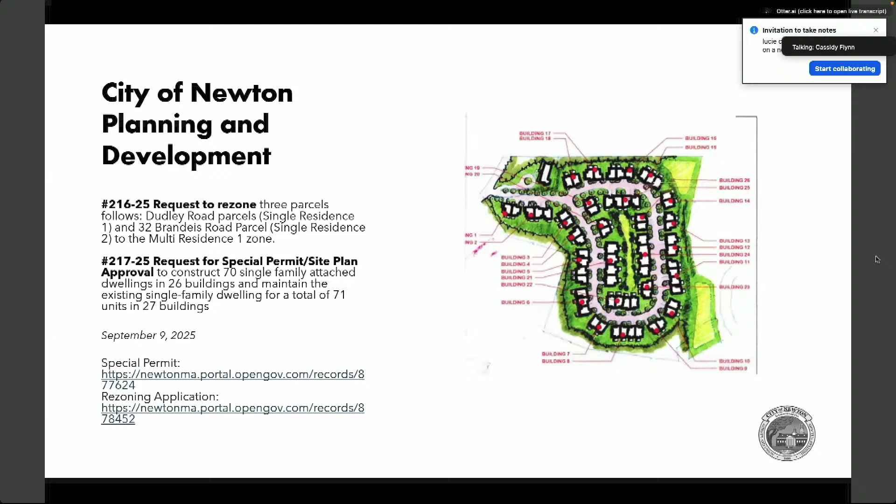And then petition 217-25 is the special permit accompanying the rezoning to construct 70 single-family attached dwellings with dimensional waivers. This site is comprised of 3 lots and is located within single residence 1 and single residence 2 zoning districts between Thompsonville and Oak Hill, just 500 feet south of Route 9, or Boylston Street, as shown on the map.

Dudley Road is comprised of longer, at times narrow, lots ranging from 25,000 square feet to 598,341 square feet, which is one of the subject parcels. The site's topography varies and is such that from the Dudley Road frontage, there is a steep downward slope into the site, about a 22% decline. The property then slopes upwards towards the middle of the site. It then slopes downwards again towards the Brandeis Road frontage.

From the midpoint, the site also slopes downwards to the side property lines, approximately 20 feet downwards to the east and 40 feet towards the west. The petitioner proposes to rezone these 3 lots to the multi-residence 1 zone to construct 70 units of townhouse-style new construction in varying configurations of 2 to 4 unit buildings while maintaining the single-family home that exists at the Dudley Road frontage for a total of 71 units.

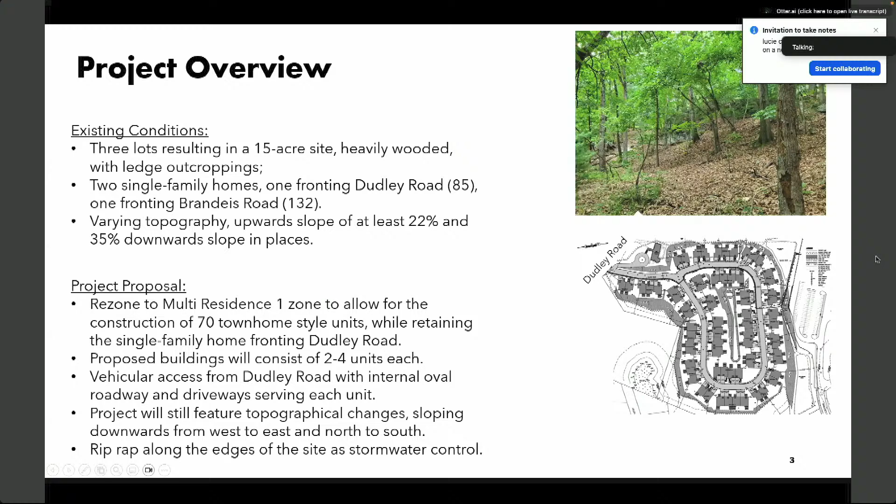The special permit relief requested under the Newton zoning ordinance is as follows: to allow single-family attached dwellings, reduction of the side setback, exceed the maximum allowed building height, to allow 3 stories, to allow retaining walls 4 feet or greater in height, and to allow the cash payment in lieu of providing 12 affordable housing units within the project.

The height section of the zoning ordinance was updated this council term to prevent manipulation of the grade, thus requiring building heights to be measured from the lower of either the existing or proposed grade. Planning notes that due to the topographical variations of the site, the heights of 15 of the buildings and the existing dwelling require special permit relief to exceed 36 feet in height. These buildings are measured from the existing original average grade, as that is the lower of the 2 points between existing and proposed grade.

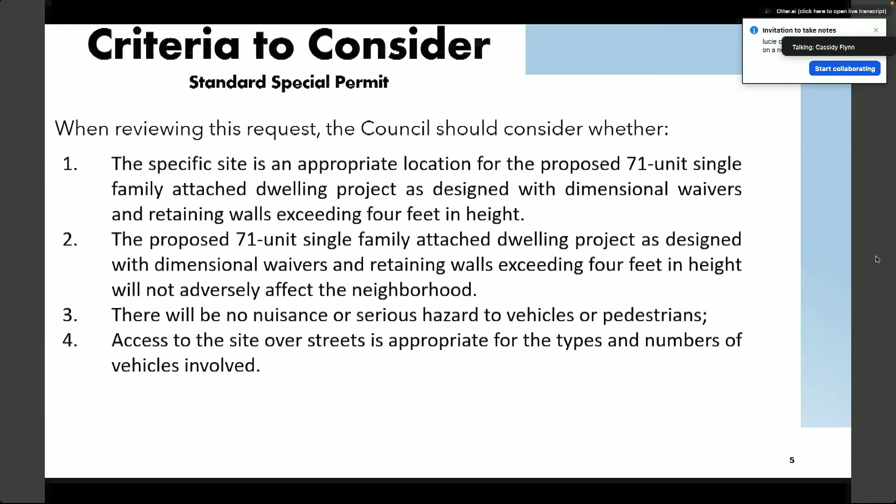As such, these buildings range in height from 38.35 feet to 53.97 feet as the measurement is taken, where 36 feet is the maximum allowed. When reviewing this request, the council should consider the 4 standard special permit criteria: an appropriate location for the project, whether it will not adversely affect the neighborhood, whether there will be no nuisance or serious hazard to vehicles or pedestrians, whether access to the site over streets is appropriate for the types and numbers of vehicles involved.

The council should also consider the retaining wall criteria and the inclusionary zoning criteria. So the retaining wall criterion is whether the lot presents challenging topography, which limits the use of the property such that it could not be improved without the implementation of the retaining walls over 4 feet in height.

Whether the combination of retaining walls over 4 feet in height will not adversely impact adjacent property, the neighborhood, or the public, and whether these retaining walls are the minimum structure necessary to allow the property to be reasonably utilized.

Regarding the request to contribute to the inclusionary zoning fund, the council needs to make the finding that there will be an unusual net benefit to achieving the city's housing objectives as a result of allowing a cash payment rather than requiring the development of inclusionary units. The finding must include consideration of the appropriateness of the development site location for income-eligible households, including proximity to and quality of public transportation, schools, and other services, and the current balance of the inclusionary housing fund and the purposes of the inclusionary zoning ordinance.

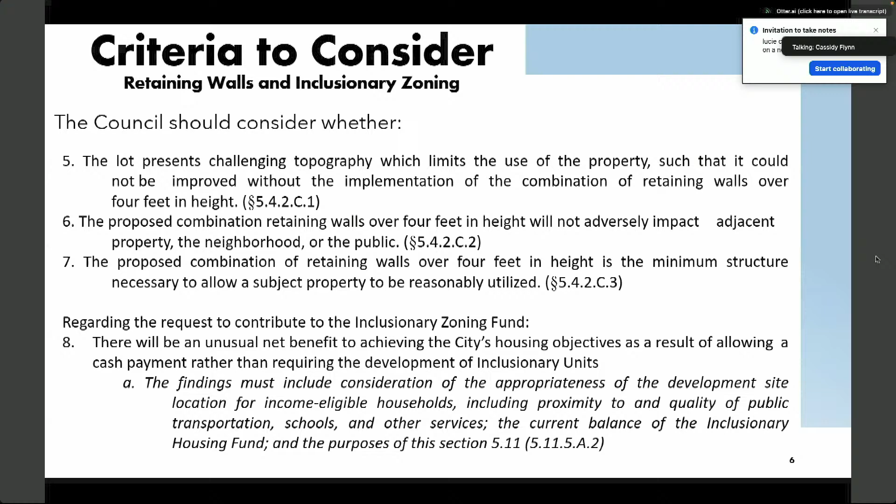In 2022, the city issued an expression of interest for the subject property, also known as the Dudley Road Estate, to solicit development proposals. City-specific interests were identified as development of a cooperative property plan, which enables significant open space conservation, tree preservation, and the protection of wildlife habitat. Exploration of cluster development to maintain cohesive undisturbed areas for conservation and passive recreation purposes and protect environmentally sensitive features.

Opportunities for affordable housing beyond the city's required inclusionary zoning. Support of the city's goals for upholding and furthering diversity, equity, and inclusion. Reservation of a to-be-determined portion of the property for future use for school or recreation facility needs.

A conceptual development proposal was selected that focused development within the middle to lower portion of the site, consisting of 22 buildings with 3 to 6 units each for a total of 75 to 125 units. Additionally, 2 proposed single-family homes were included along the Dudley Road frontage. The conceptual project avoided development on areas with a steep slope and left an adequate amount of open space available.

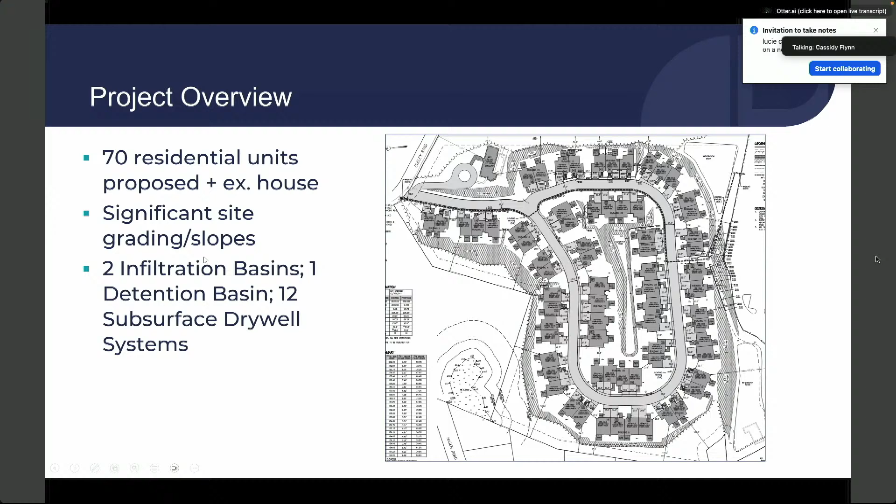I think the project has been overviewed plenty. Very quickly from a stormwater management perspective, they went over it in detail, but there are 2 infiltration basins sort of on the edges of the site, call it the back edge of the site, 1 detention basin in the middle of the roadway, and a series of 12 subsurface dry well systems spread throughout the site adjacent to various buildings.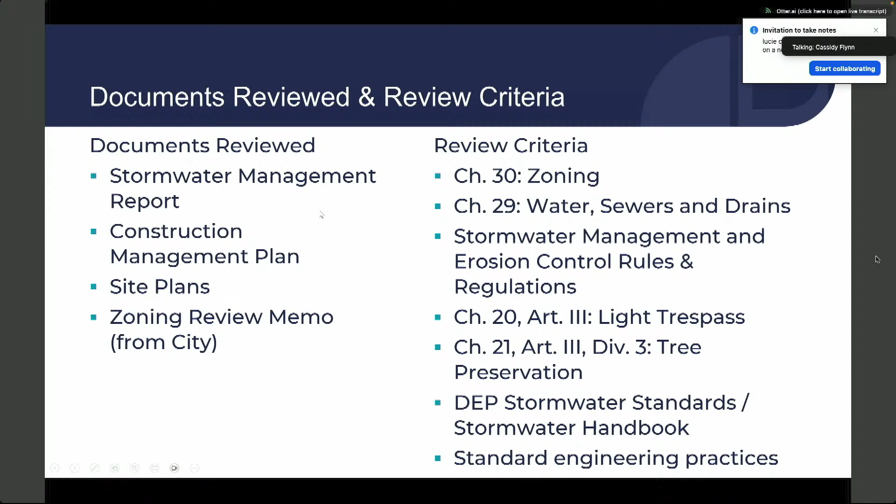For the site plans, a couple of these were actually addressed to some degree in the applicant's presentation. As they mentioned, they are proposing a walkway to the high school in the back. A couple of our points on that were just ensuring that any access agreements, whether with the city or with the private property, are put in place. There is a fence there currently. The fence being open, is it going to be gated? It's a little unclear from the plans how that's going to work.

And as they mentioned, there is a set of stairs at the end of that walkway. So it's clearly not an accessible path. We would request that the applicant look into if it's required to be an accessible path under the law, and if it does need to be, obviously, to revise that to get it in place.

But while I know the city has restrictions on retaining walls, this is a spot where retaining walls or a series of terraced retaining walls could potentially reduce how far out that disturbance has to go to meet existing grade, and also provide some terraced areas that could be landscaped. And then regardless of what they do, there were no details on how those slopes were really going to be finished in the plans.

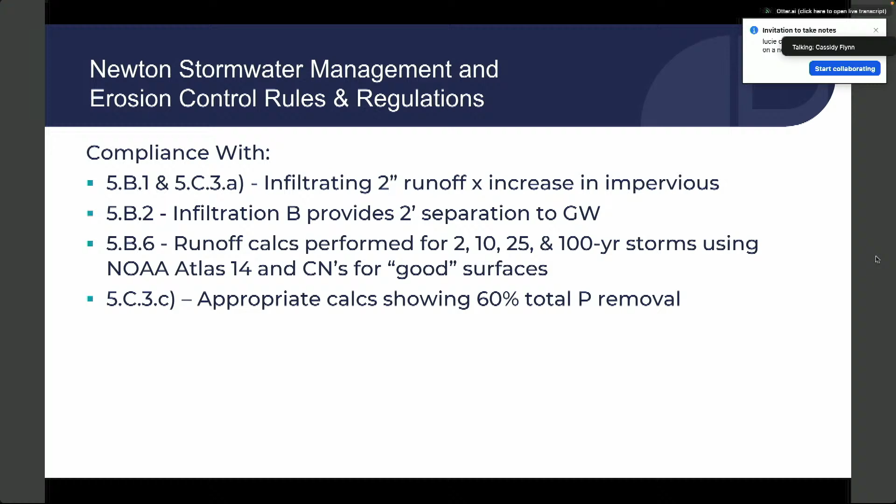A few questions we had on those regs. These are things that are probably very easy in my mind to calculate, to determine or revise. A lot of I dotting and T crossing. Section 5A5 requires 1 foot of separation from seasonal high groundwater at the bottom of the building slabs. It's not clear if they have that. They also don't necessarily have test pits in all of the locations these city regulations would require.

As part of those test pit requirements, the city also requires, for test pits that are performed, I believe it's from June through February, what's called a Frimpter analysis. Basically, June through February, as you can imagine, are when groundwater is not expected to be at its highest. So if you dig a hole and look for groundwater, you might not see it at its highest.

So a Frimpter analysis is basically a calculation that compares your on-site observations to these indexed USGS wells in the area in similar soils. And there's a calculation where you can make an adjustment and figure out where your seasonal high groundwater actually is. They did not provide those Frimpter analyses. Those drywell systems I mentioned are less than 10 feet from some of the buildings as required.

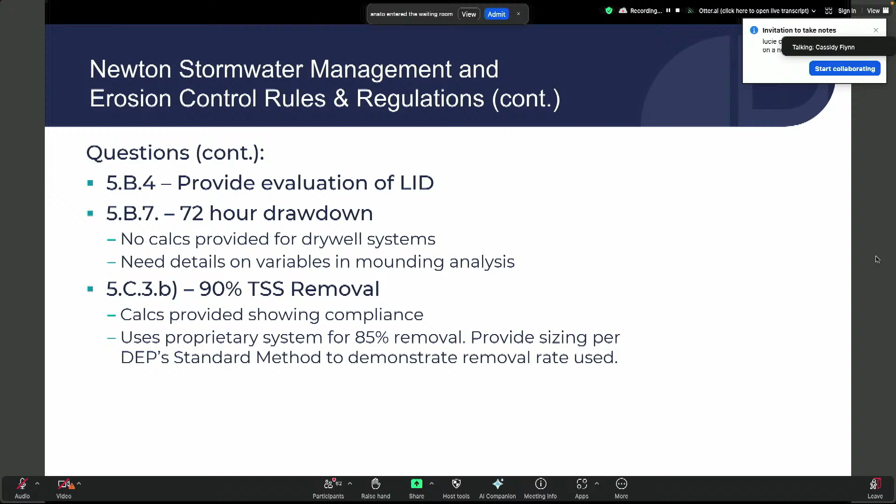DEP issued a methodology a number of years ago because those systems are based on flow rates. They're sized based on flow rates, and TSS removal is based on volume. So DEP has a standard calculation to convert that volume to a flow rate to make sure those systems are sized right. So we've just asked them to provide that.

These two items are what I would call potential issues. These are maybe a little more detailed, may require a little more effort to provide the information needed or make some revisions that might be needed. So infiltration basin C, which I believe is the southwest corner of the site. I believe north is page left.

They have a series of test pits in there as they need to. And some of these test pits appear to show groundwater and/or refusal, which on this site is likely ledge, higher than the bottom of that basin. Obviously with groundwater, they need to maintain at least that 2 foot of separation from seasonal high groundwater at the bottom of the basin. And obviously trying to recharge into ledge is not that feasible. So they need to look into that.

And this 72-hour drawdown thing again. As part of that, they've provided, as they needed to, what's called a groundwater mounding analysis. Basically, as water comes out of the bottom of these systems and spreads out in all directions, you get a temporary mound. So literally a hump of groundwater under these systems. This analysis determines how big that hump is, how high up it comes.

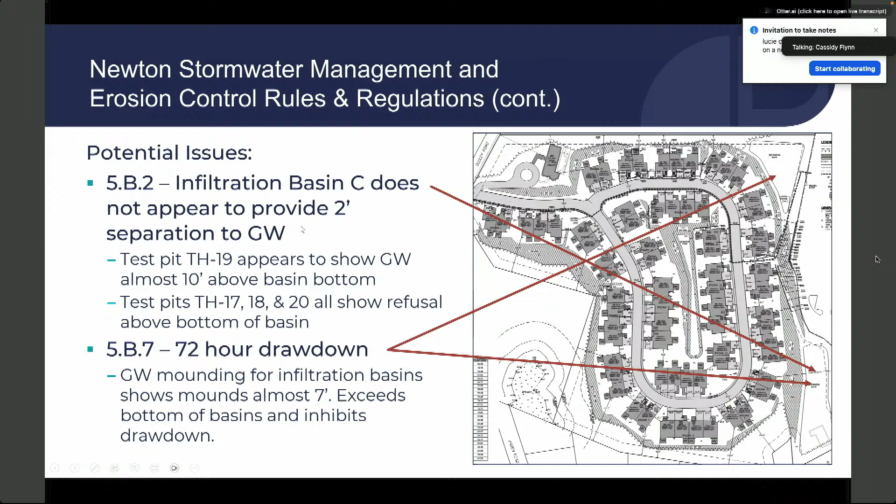Their calcs actually show that mound coming close to 7 feet high. They don't have 7 feet of separation to groundwater, which means that mound is going to reach the bottom of their infiltration systems, and those systems won't be able to infiltrate at the rate that they're proposing. And therefore they may or may not, that needs to be determined, actually empty within the 72 hours. So they need to take a look at that. Sorry if I'm going very quickly.

Couple of questions on the stormwater standards. Stormwater standard 2 involves pre and post development peak discharge rates. Basically, you develop a site, you put a bunch of pavement and buildings down where there was woods and grass, you get more stormwater runoff. They did very thorough calcs. Most of the information in them we totally agree with. Just a couple of small items, which again, they may have addressed this first one.

They used a curve number for that surface condition, and they didn't have anything that represented the riprap slopes, and it appeared from their design that they had a bunch of riprap slopes. So if they are planting those slopes, that may be the answer. If it is going to be stone, you'd expect more runoff off the stone than you'd get from grass or woods.

And this one is very techy, and I apologize, but in the time of concentration calcs, there's a variable. They chose woods with dense underbrush. Years ago, DEP issued a document stating that that is not an appropriate condition in Massachusetts. They should be using woods with light underbrush. It'll change their numbers slightly. They might have to make a small tweak to the design. I don't see it as a big issue.

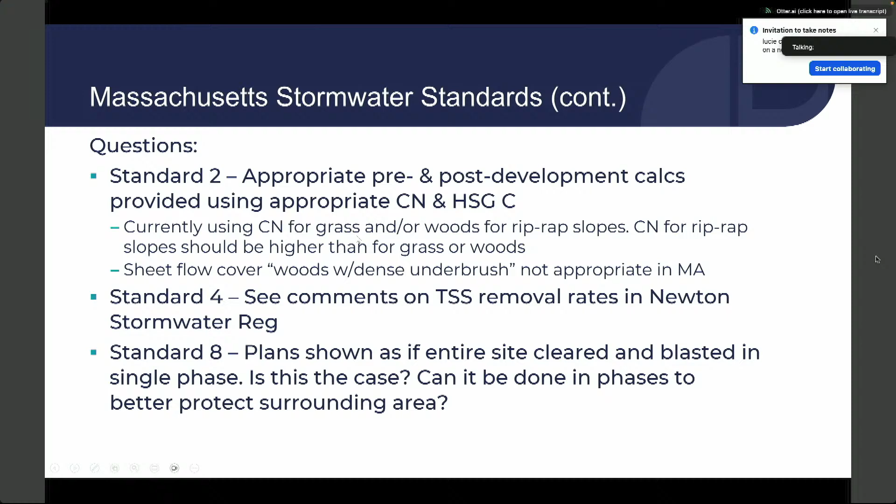Either into a downstream wetland or a neighboring property or a street, none of which are great. And finally, Stormwater Standard 3, which deals with recharge to groundwater. Again, it's those same two questions we had about separation of groundwater in the Southwest Basin and groundwater mounding in both basins. So I promised I'd be quick.

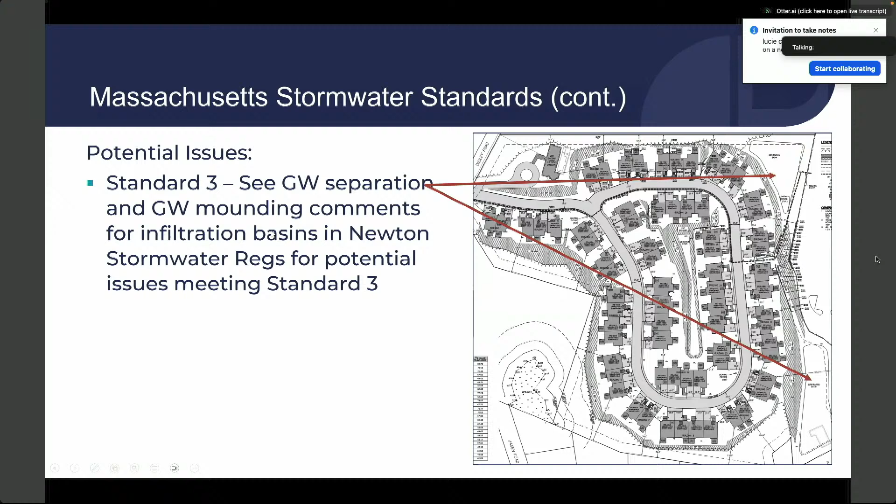I don't know if you want to do questions and answers now, or if you want to move on to Amy and then come back to it later.

Yeah, I'm hoping everyone is taking notes of their questions so we can do the questions at the end of all the presentations. But thank you very much, Mr. McNulty. And I was a sucker for some of that stuff. I'll get super techie later if you want. This is stormwater, it's my thing. Thank you.

All right. Hello, everyone. I'm Amy Allen, traffic engineer with BSC Group. I'm going to share my screen.

I'm going to probably skip a lot of the stuff in the beginning that's already been covered by the applicant's traffic engineer. I don't want to repeat anything they've already gone over. So a quick agenda: project overview, study area, traffic data, trip generation and distribution, capacity analysis, discussion about the driveway sight distance, and then some additional comments, including on the traffic calming memo and the site plan review as it relates to transportation.

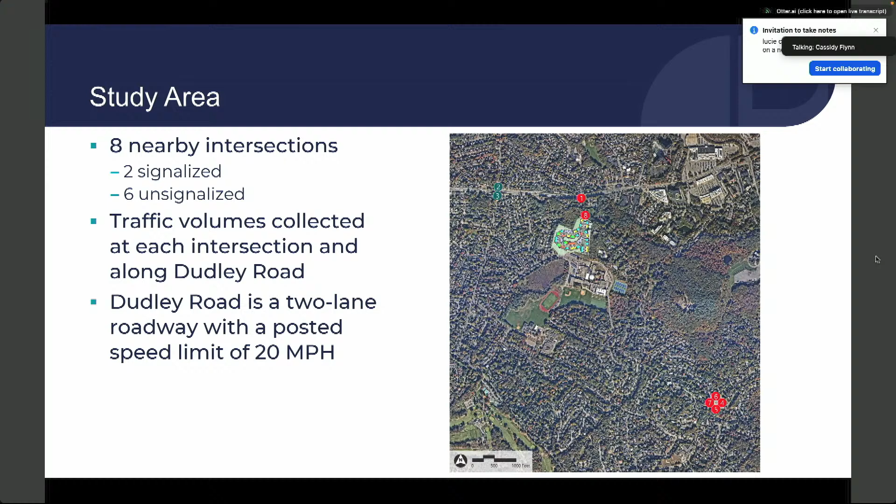The study area has been gone over. Two signalized intersections were looked at and six unsignalized intersections. Dudley Road is a two-lane roadway, posted speed limit 20 miles per hour. The traffic data collected along Dudley Road showed a weekday volume of about 2,200 vehicles, morning peak hour close to 200, and evening peak hour 280. As mentioned before, the 85th percentile speeds were 32 and 30 miles per hour in the northbound and southbound directions, which is obviously higher than the 20 mile per hour posted speed limit.

For the trip generation, this has also been gone over: land use code 215 for single family attached housing. We reviewed the description of that land use and found it appropriate. We double checked the calculations and agree with the 33 trips in the morning and 40 trips in the evening. In the city of Newton generally, there is a percentage of people who take public transit, walk, or bike to work. In this case, the mode share reduction was not applied because there aren't really many pedestrian accommodations to the site, so that provided for a conservative analysis.

Also, my understanding is that a previous iteration of this site plan used 74 residential units, and as was discussed before, it's now down to 70 units. These estimates were based on that 74 units, so even these we found to be a bit conservative.

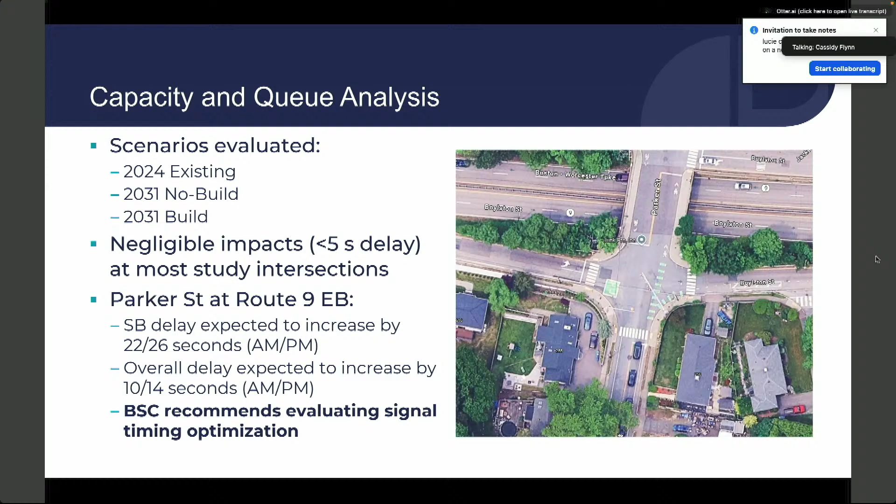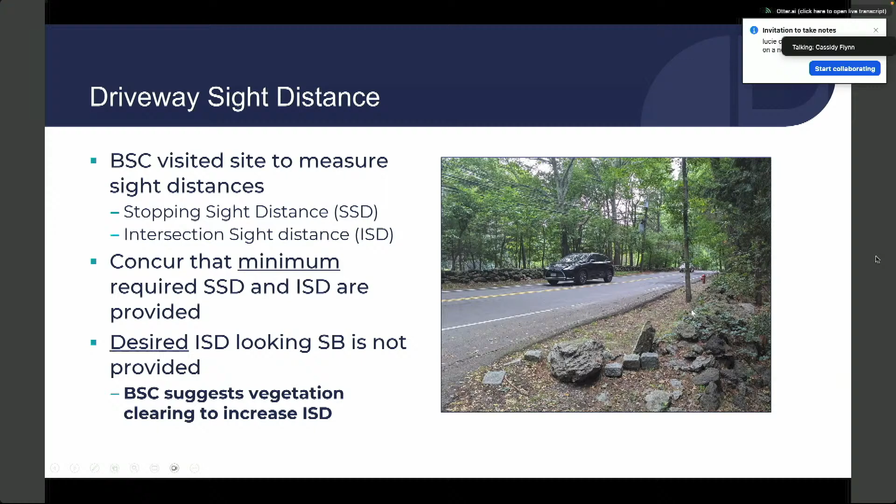Additional comments: we requested that the applicant include discussion of transportation demand management strategies, something the city generally requests on developments like this, which we found missing in this case. We concur with the recommendation that speed humps combined with speed feedback signs would be appropriate traffic calming measures for this roadway context. We also noticed horizontal curves on the road that we think could be better marked for visibility to try to prevent run-off-the-road crashes, so that's something we recommend be looked into.

And then lastly, taking a look at the site plan from a transportation access perspective, we requested plans showing emergency vehicle access and circulation using the City of Newton fire engine. They showed a figure with trucks circulating throughout the site, but we requested an additional figure showing an emergency vehicle accessing the existing single family home, now that the geometry of that driveway is going to change. We also requested calculations and figures for sight distance internal to the site.

So there's one proposed crosswalk. We wanted to make sure that the minimum required sight distance is provided at that crosswalk so it's in a suitable location for pedestrian safety. And at the horizontal curves internal to the site, we'd like calculations or figures showing that appropriate sight distance traveling around those curves is available.

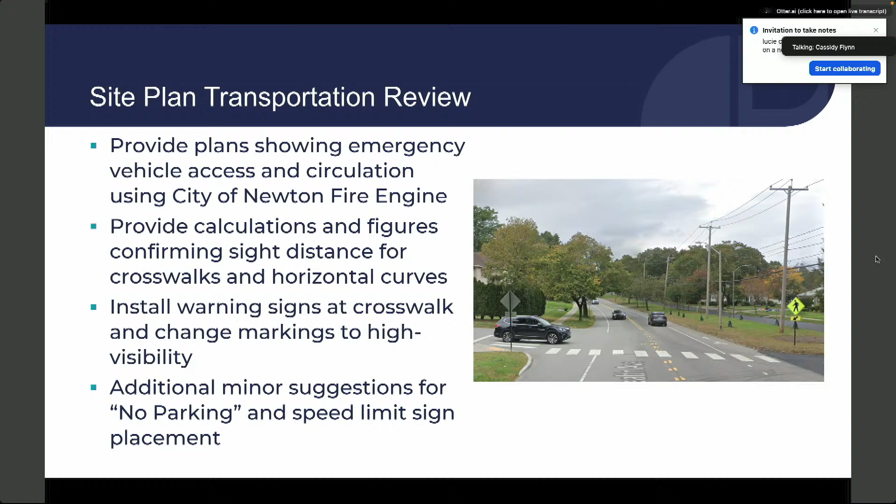For the crosswalk within the site, we recommend the markings be changed to high-visibility markings, to be more consistent with city standards and for better visibility, as well as installation of warning signs at that crosswalk for increased visibility and safety of pedestrians. We had some other minor comments about sign placement for some no parking signs and one of the speed limit signs within the site. That was the last comment we had, and we're awaiting responses from the applicant and ready to review them whenever they come in.

Thank you. Thank you very much. Madam Chair, I just have two more slides if that's okay. Oh, wrap up. Sorry, I was just thanking her. Oh yeah, no, I know. Doesn't mean we're done, thank you. Just want to close it out.

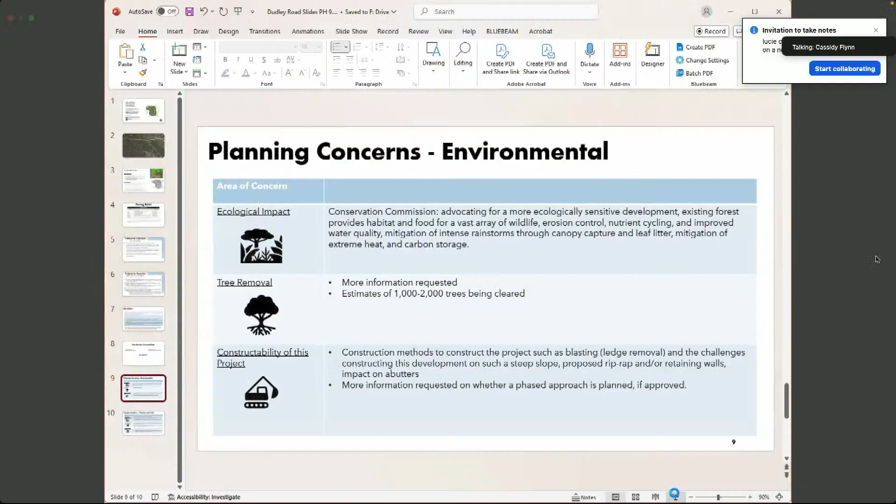So to close it out, thank you Amy and Dominic for those presentations. The planning memo outlines several concerns with this proposal. This slide shows the environmental concerns around the project: the ecological impact, with the Conservation Commission advocating for a more ecologically sensitive development.

On tree removal, the petitioner has not engaged the tree warden. Further information is requested on the number of trees that will need to be cleared to construct this project, the overall constructability of the project, methods such as blasting for ledge removal, and the challenges of constructing this development on such a steep slope, proposed riprap and/or retaining walls, as well as the impact on abutters. More information is requested on whether a phased approach is planned if this project is approved.